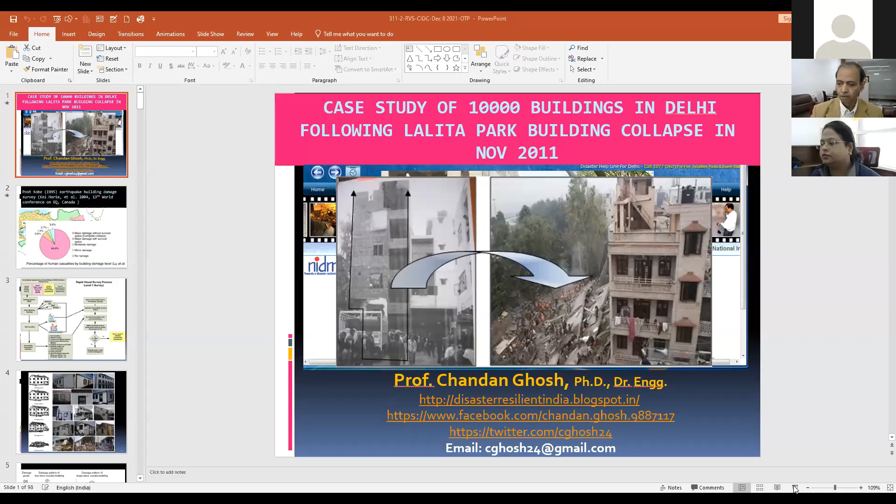So let me share my things. Okay, yes. Okay. Is it visible? Yes, sir. Okay. So this is something that I'm going to show about the case study of

10,000 buildings in Delhi, which was taken up after the Lalita Park building collapse. The study was taken up in November 2010, when the building collapse happened, and then we took it up in 2011 and submitted our report in November 2011, this survey report.

And the report was submitted online, because the format that we are going to discuss quickly today, even after that in the last session of today's session, is about the kind of software that was developed at that time in PHP programming at NIDM.

These are some of the photographs taken where the building, which you can see, collapsed all of a sudden. At that time it was raining heavily, and 2010 was the year Delhi organized the Commonwealth Games. There was heavy rainfall in Delhi, a record rainfall, which inundated many areas in the east part of Delhi.

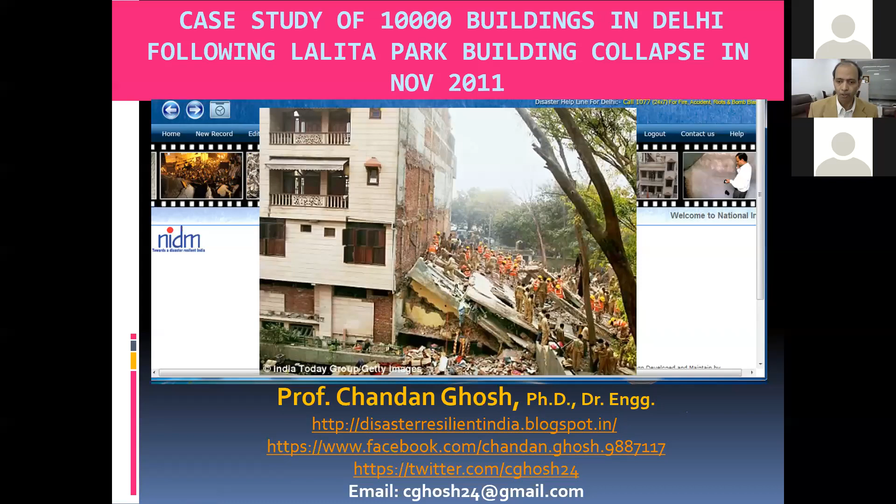This was the building photo that we could collect from some sources during the investigation, showing the building before the collapse. This we could collect at that time from some sources. And after the collapse, this is the condition, the other side, as you can see.

Now let us see that we have been doing some kind of exercise, but very few such studies have been done meticulously in our context here. That is why, in order to take inspiration from some well-known case studies...

...like the Kobe earthquake, post-Kobe earthquake building damage data in this city, which is presented in a paper by K. Horie et al. The survey was done following the earthquake, and it is published in the 13th World Conference on Earthquake Engineering, Canada. The paper is available online. You can see what kind of meticulous survey was done, and what measured damage ratios were found. In 1996 itself, this survey was done following the earthquake in 1995.

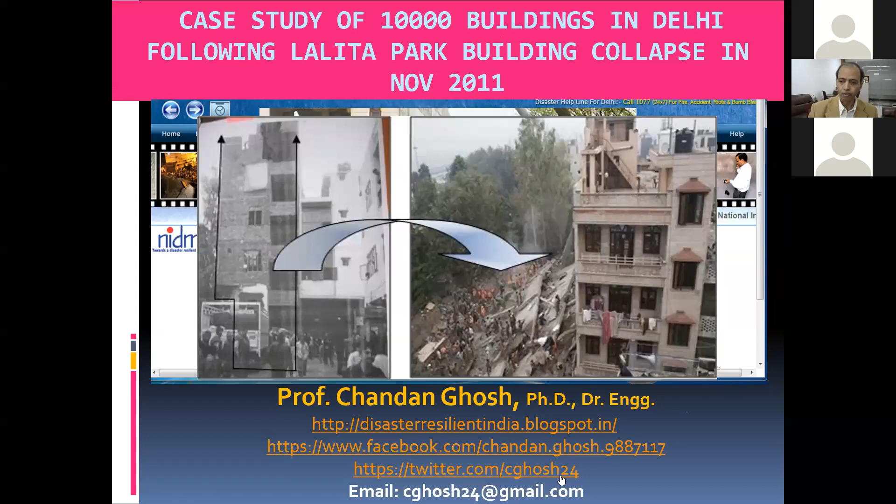Now there are many steps, taken from examples elsewhere about India. These include various steps like rapid visual screening survey, detailed vulnerability and case-specific vulnerability assessment, which we have discussed. Then types of buildings: masonry, RCC, steel, wooden, mixed, and industry, and many such types.

So think about how, when we are making the software, it will need provision for classifying the building type that comes in. And then what are the vulnerability factors for building typology?

Its location, whether hill area, slope area, soil conditions, seismic zoning, local and collateral hazards, and then construction material used, and the age. Then building features and profile, whether it has a cantilever, soft story, steel, mixed construction, or whether retrofitting has been done before or not.

So you can see, what we did in 2011 had more than 325 aspects, which I'll show.

But if we go into finer details, there may be more than 2,000 parameters which we have to identify while going for step 1, level 1, level 2, level 3. So in that case, the server or the software will have the space for keeping all this data.

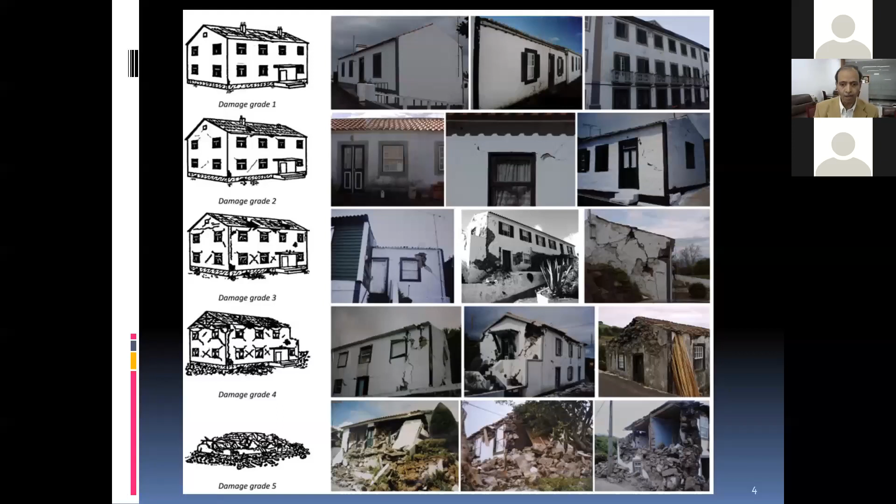So our aim is to get all of you familiar with seeing the idealistic sketches of damage pictured here and getting familiarity with matching that in the field. So you can think of how much - not knowledge, I would say, but understanding the motive behind going for such kind of damage classification.

In Japan itself, in the same paper, they have got damage grades D0, 1, 2, 3, 4, 5, 6 - similar kind of classification. Here there is a damage pattern for a 2-story wooden building, which they took as an example. So we have taken inspiration from such discretization of building damage categories done by various agencies across the world and in the country.

So these are the guidelines, the building damage pattern chart for wooden buildings only. If it is RCC building, steel building, or prefabricated building, mud type of building - day before yesterday I mentioned in one of the projects taken up by NDMA more than a decade back, about 33 types of buildings have been identified in India. So you can say Assam type house, Dhajji Diwari house - that is also one of the types.

So we say the mud house. There are mixed construction, there are prefabricated construction. So all these things have been categorized there.

So while going for this survey, we have to put those typologies, already defined and available, into our server, so that wherever the survey will be done, irrespective of the places or geology, the building types are predefined in the software so that you can match and select the type of building you are surveying, so that we get authenticated information from the field.

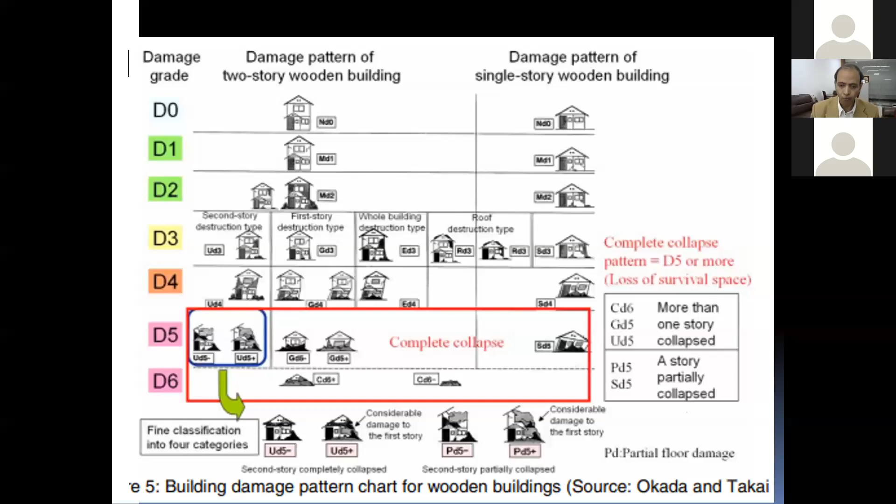Not only damage - that is one domain - but also building type, which is undamaged or currently existing. So when we are mapping their current situation, there are some other criteria which are to be populated into the software.

So according to grade 1, grade 2, grade 3, and then RCC building, then masonry building - like in our survey we have identified 20 types of buildings. For each of them, such kind of category will come.

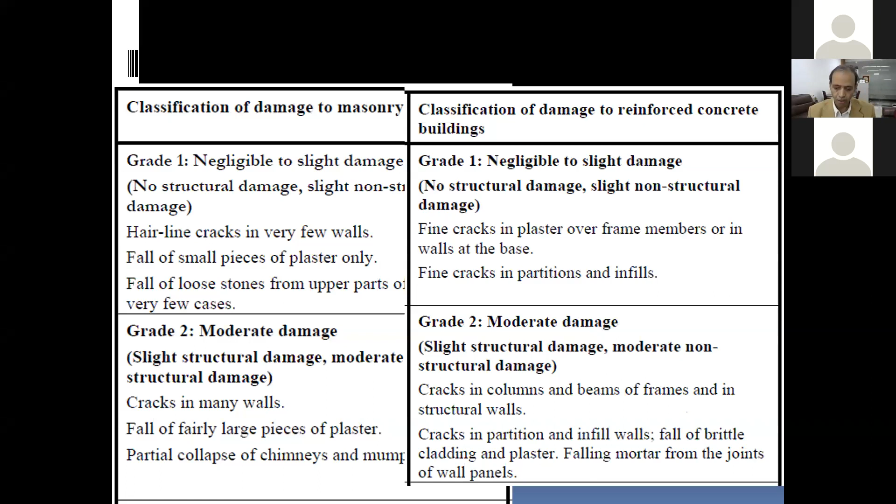So you can think of the amount of database we have to handle, and they are to be related and characterized - category of the building and vulnerability based on factors like hazard, whether it is earthquake, earthquake and landslide, or earthquake and flood. So those categories will come when we are able to match and relate them based on the type of building and type of hazards, whether single, double, or mixed - everything.

So it is a huge exercise to be made, and I would say it is much more complex than what we have been thinking of so far.

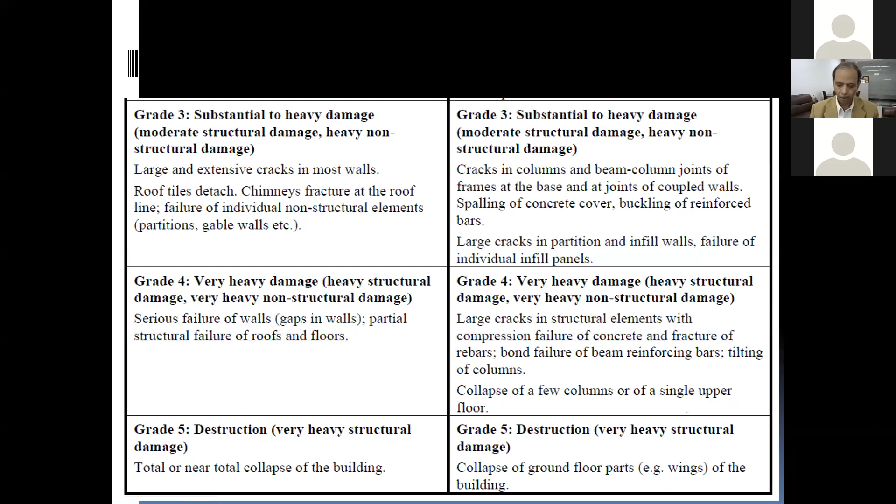There are 5 types of destruction, from very heavy structural damage to lesser grades, given pictorially and also shown. There are certain ways to score them, because when we make building damage a category, grades 1, 2, 3 don't make sense by themselves, except that by seeing the images we can make sense of it, but that needs experience. What we have to do is convert them into numbers or scores or some kind of standard for comparison and probability.

So a lot of approaches have been made. I will not go into those details, but basic structural hazard scores, score modifiers, and final scores are all measures of seismic damage potential of the building under evaluation. It is minus log 10 of the probability of collapse given the maximum considered earthquake. These are some of the basics involved, which we have to incorporate before making the software for survey available to trained engineers or even students next year.

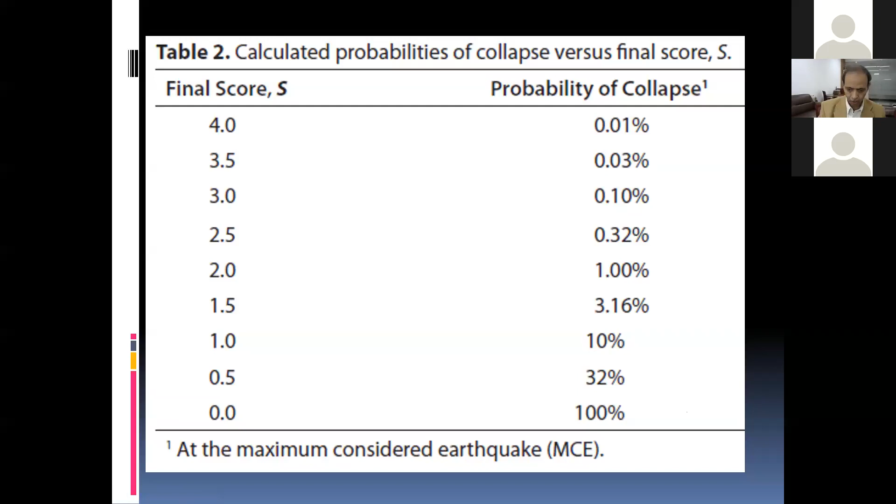These are some of the things that will be taken up which are not available or not under the scope of IS 1893. Based on that basic score, soil class will also be taken up.

Soil class, according to NEHRP USA International Building Code, defines hard rock, very dense soil, stiff soil profile, soft soil profile, and something even weaker which is not engineering soil. Depending on the type of soil, if an earthquake occurs in hard rock, the response will be different than if the same earthquake affects the subsoil on which the building is considered. These things will come up in the FEMA methodology, which has also been revised recently, around 2013-14, based on these considerations, which is a different area.

Then, for the type of building, you see what they have done and what we have done as well. They have made about 15 types of buildings. Concrete types are C1, C2, C3, then tilt-up buildings, and we also have PC1, PC2 precast buildings, then light wood frame residential buildings. These are all classifications defined in the FEMA code, which initially came up in 1988 and was revised, then further revised again. It is available online, you can see these details.

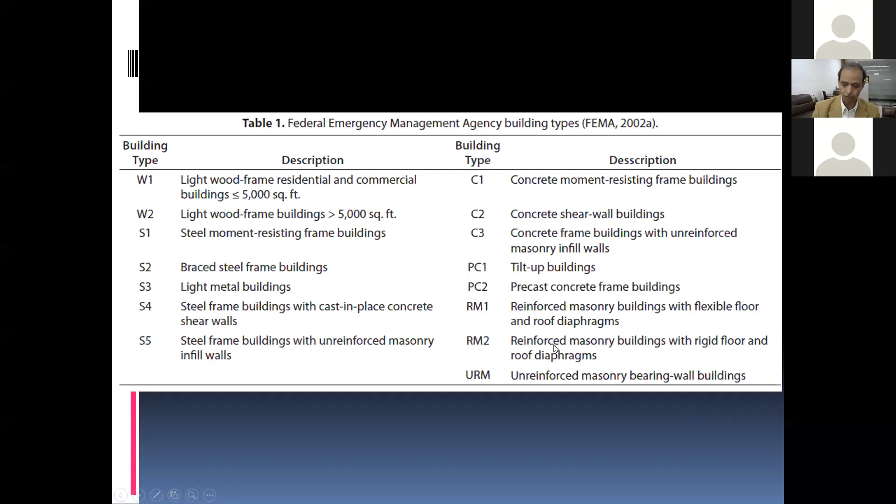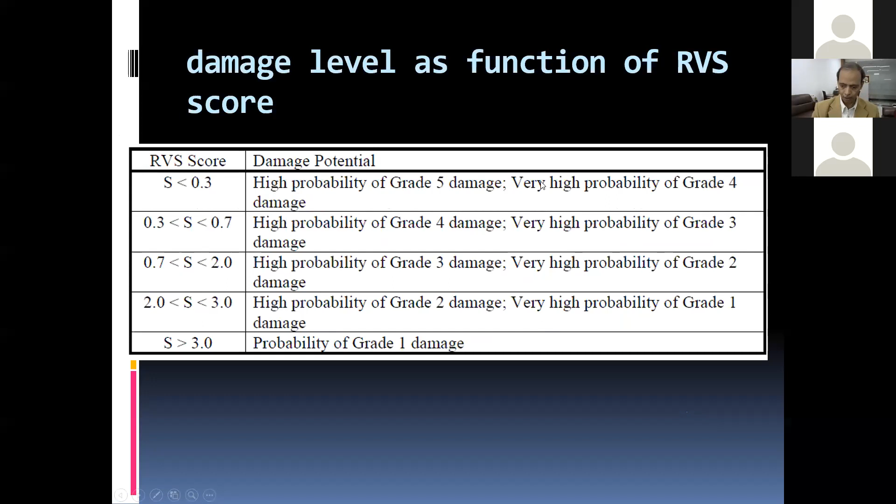So finally we come to the RVS score, the rapid visual screening score according to FEMA. Let us go into this, this is for seismic zone 4-5, which has been adapted in our code from FEMA 154. This was adapted into our code way back in 1993, and some of these rapid visual screening formats are available in the code, which gives us a way to make a score based on the defined procedure.

So while going for the real building check, which we are aiming at, this was done way back. Now, along with software on mobile, laptop or desktop, we would see this while checking buildings, as it is being done physically here. When this scoring as per this definition is done after visiting the site, we put the information in this manner, and we get certain valuable information which we want to make available on the website, and also for the decision maker, whether in the line ministries or departments in the country, for taking necessary steps based on this classification. All those classifications are mentioned here.

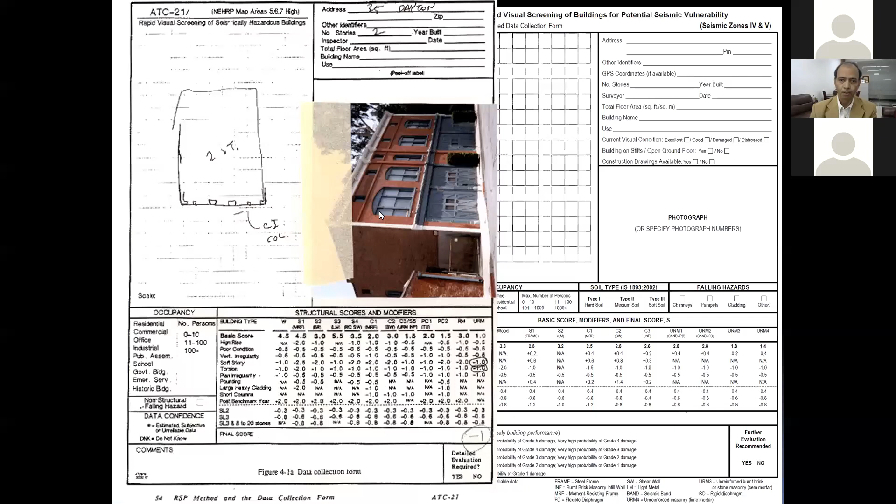Anyway, there are many other things. Let me go directly to the point quickly because of time. Okay, 2 minutes I can take. I was speaking to Nitin sir, if he could wait 5-10 minutes, then you can complete your presentation. He has joined, it seems his name is appearing. Okay, because this will take some time, I'll take it up later.

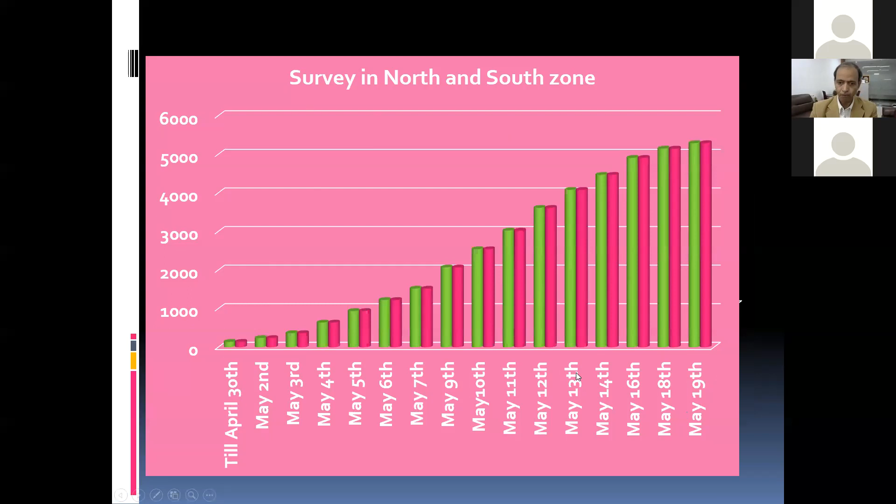Okay, my topic was how we did the survey. How many buildings have we done, and on which dates. These are from 30th April to 19th May 2011, covering almost all 64 wards in East Delhi. More than several MCD engineers were involved. Finally we got this data, mostly 79% residential, commercial, mixed use, storage, shopping mall.

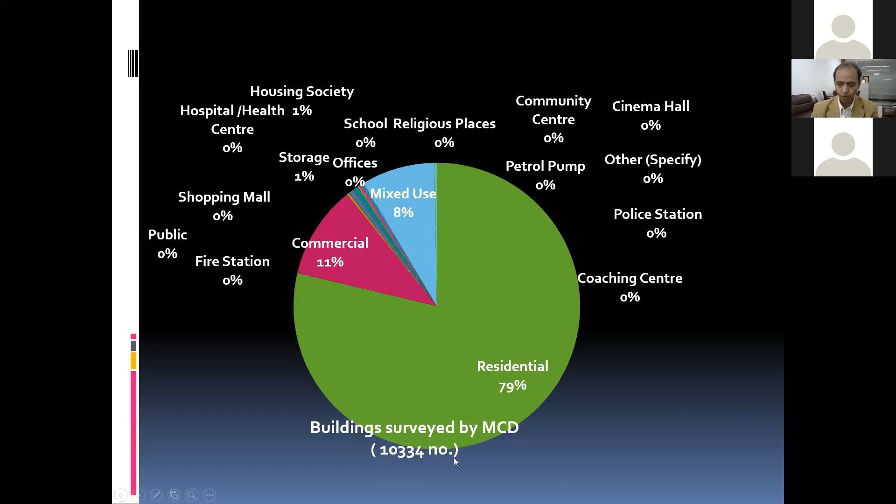There are about 20 types, even police station, though we didn't go to petrol pumps, but we kept this classification including schools and religious places. Buildings surveyed by MCD numbered 10,334, and we have shown that we also did a special survey where we gave a lot of time, more than 300 buildings.

Authentically residential, because here mostly we did residential buildings, but when we took a smaller sample, we went into all building types: educational, fire station, hospital, petrol pump, religious building 2% out of 300. So all these things including under construction buildings, water tanks, and schools 4%, like that, we did at that time.

So these are the spots, this is East Delhi. These are the spots where 300 buildings have been surveyed, shown over here from the Google Earth available at that time in 2011. We concentrated most of our buildings here, but we took samples from all these spots shown in green to represent all types of things.

In fact, in the Google Earth itself, at that time satellite data were not available. This is the ITO, and this is Lakshmi Nagar here, where a building collapse occurred. We have done maximum surveys here at this place.

And all of this was done without any expenditure, by some students that we hired. More than 30 students were hired for about 6 months on a daily basis, and they went to all these places.

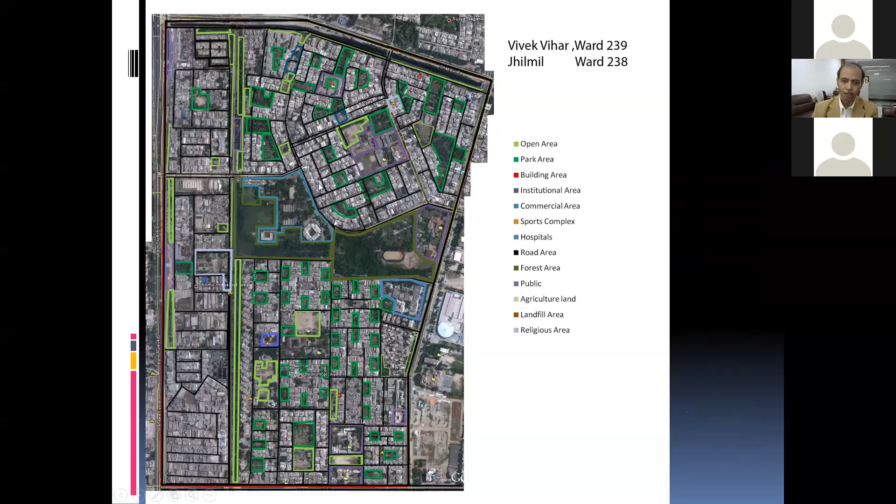So while showing the building area in East Delhi, how much is the building area? Here we said what is the building area, shown in red color, and the rest is other area. So we checked the building area in meter square, and also showed the road area, how much is the road area. So all these things we tried to discretize.

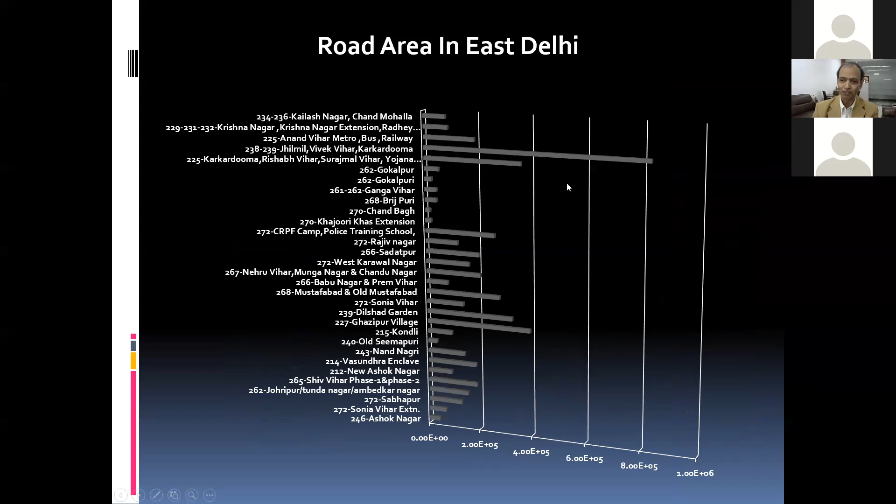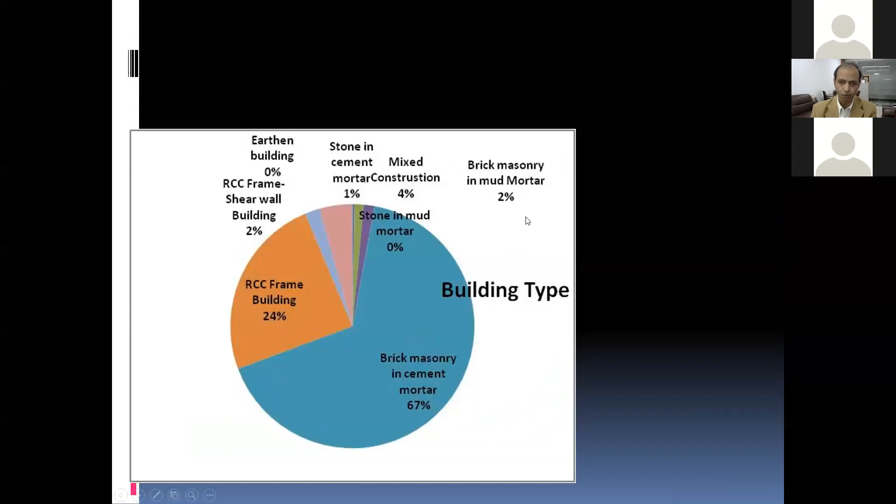Land uses in East Delhi were also plotted, and in one ward area, how much is the building area, and what are the other areas in Ashok Nagar itself, building type, brick, masonry, cement, all these 20 types, though here only a few types we have done. Building area wise also: authorized, regularized, unauthorized, resettlement colony based on MCD categorization, and age of construction was also categorized.

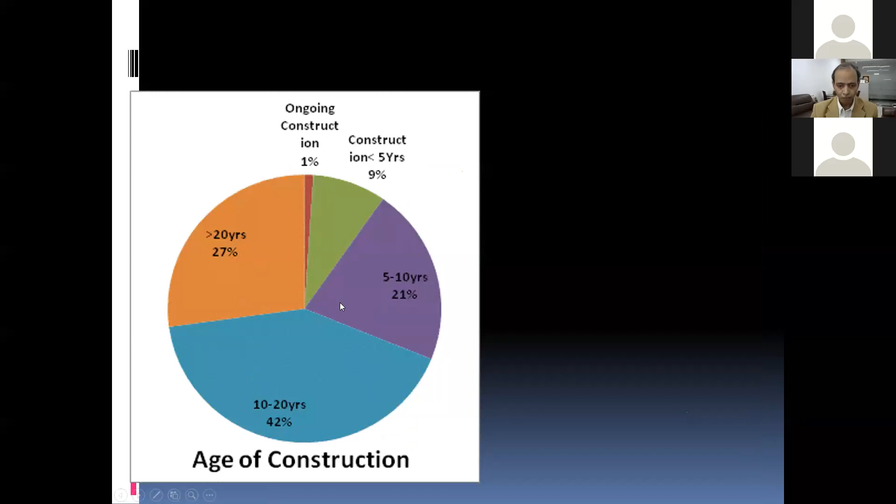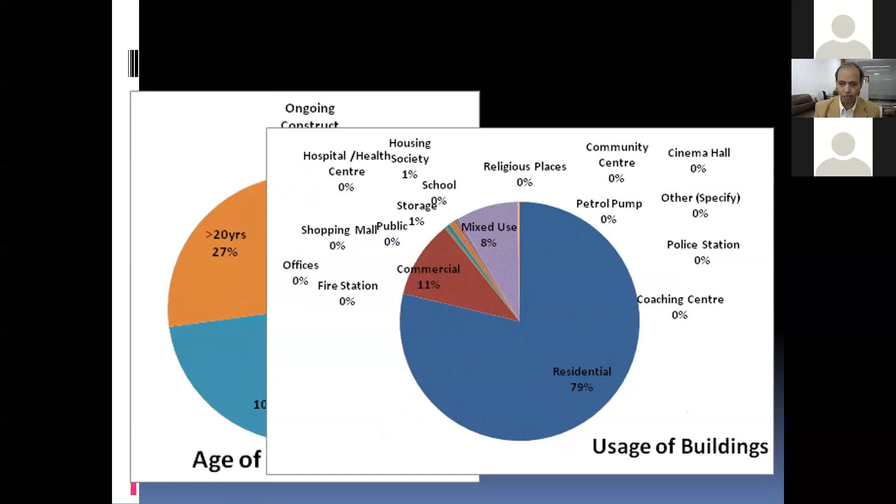This was possible because we made the software, and we could search through that software, which I showed in the first page of this presentation. So we could find out through query searching, and use all this categorization and plotting. All this is available even now in a spreadsheet that we can put into whatever format we want.

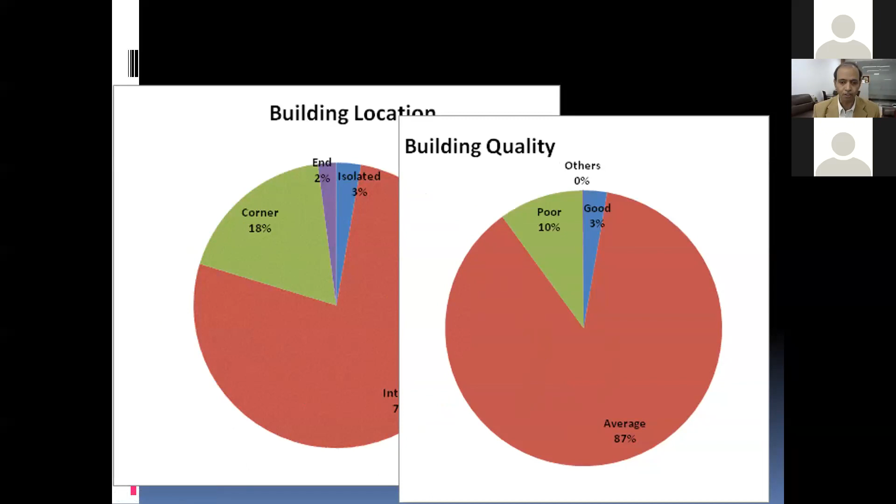Most of the buildings are internal, with other building properties on both sides, corner areas and other things. Whatever keyword, as I said, 325 cells were made, so 325 into 10,334 cells of information are there. So a query search can be made with any 1, 2, or combination, which gives us this kind of data.

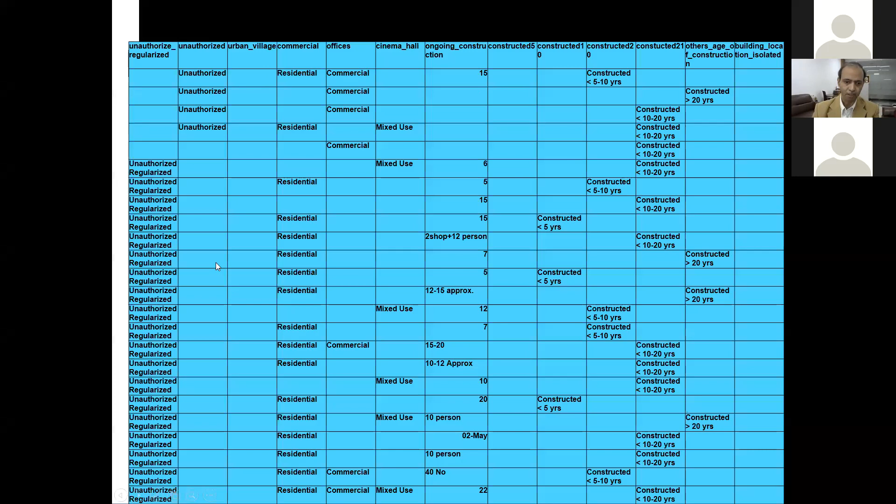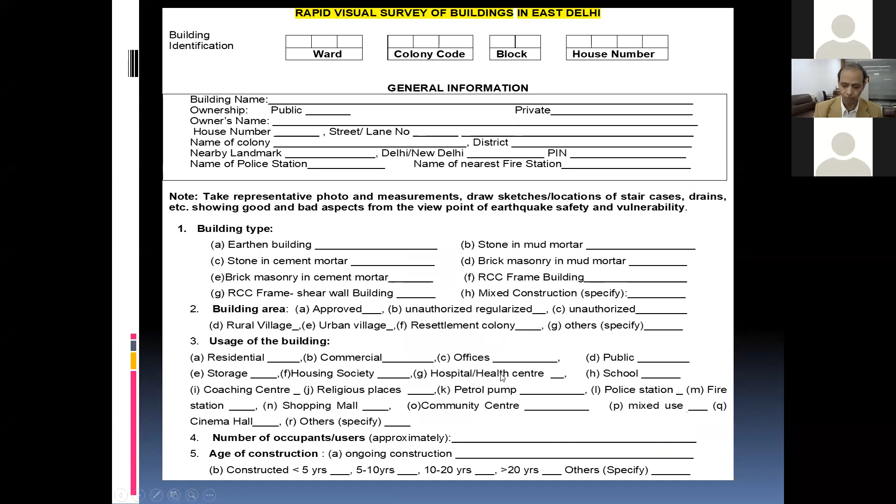And then these are the records, 10,448 records, showing that ward area, and these are the buildings. Along with that, 6 pages of the format are also made available here. In fact, we have submitted the entire thing, 60,000 pages of information, in software form and also in printed form, with more than one mirror of printed things, because court wants everything in print. So that way we could submit everything in November 2011. So all the search and queries, everything is there.

South zone of Shahdara, north zone of Shahdara. This you can locate. I'm taking cognizance of all this, and we have visited, and several engineers cooperated, and then 30 plus students that we have involved in our work, including graduate students also.

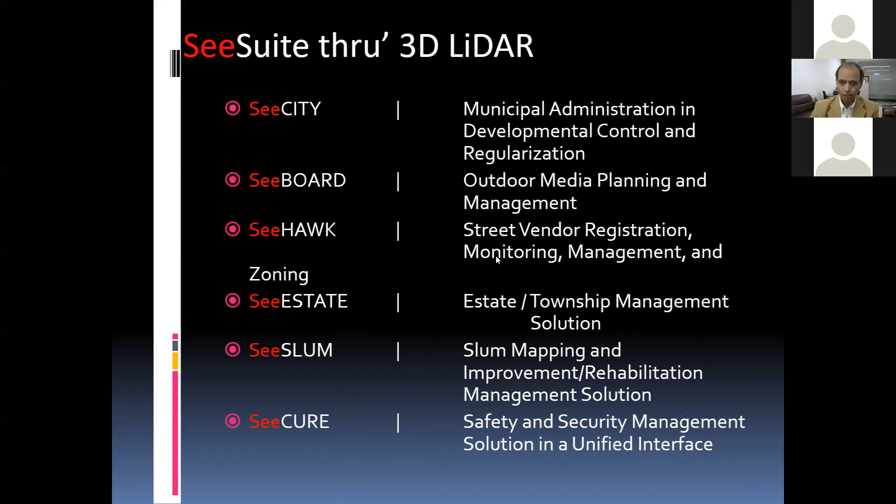Okay, let me end over here. There are many other things that we have to do, as I have mentioned, LiDAR and walkthrough survey. Through that only we can make things more easier and smarter, and lots of information that we can make available for the decision maker. Thank you.

We'll discuss maybe at the end. Yeah, yes, sir.

Okay, sorry Nitinji, I have taken your time. Thank you very much, sir, for a very informative presentation, also unique in nature. I think we need to take up such surveys and studies in different parts of Delhi as well as in other cities also. Since you have already said we will discuss this presentation after the other two presentations, we move straightforward to the next presentation by Mr. Nitin Verma, who is co-founder and managing director of ACNI, on retrofitting of buildings, the case studies.

Sir, Professor Ghosh, would you like to introduce him more? Yeah, he doesn't need any more introduction, because Nitinji is very practical as well as pragmatic, a practical architect cum engineer. He knows more engineering, site engineering, than...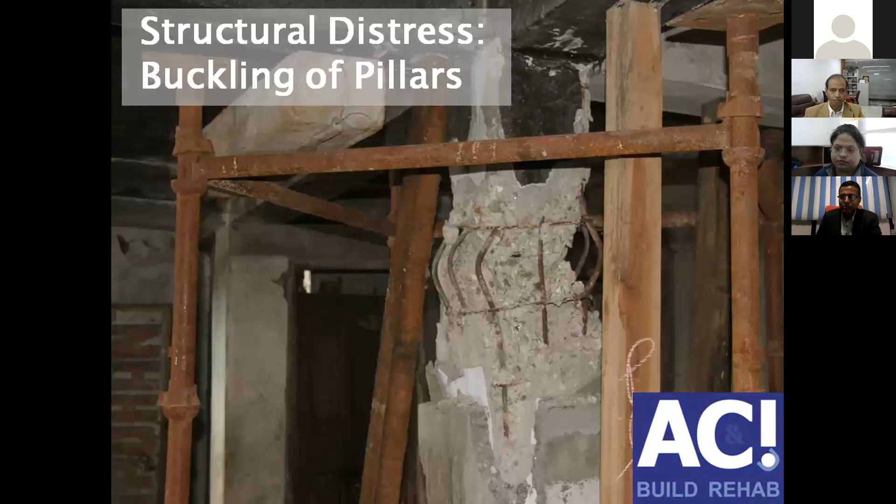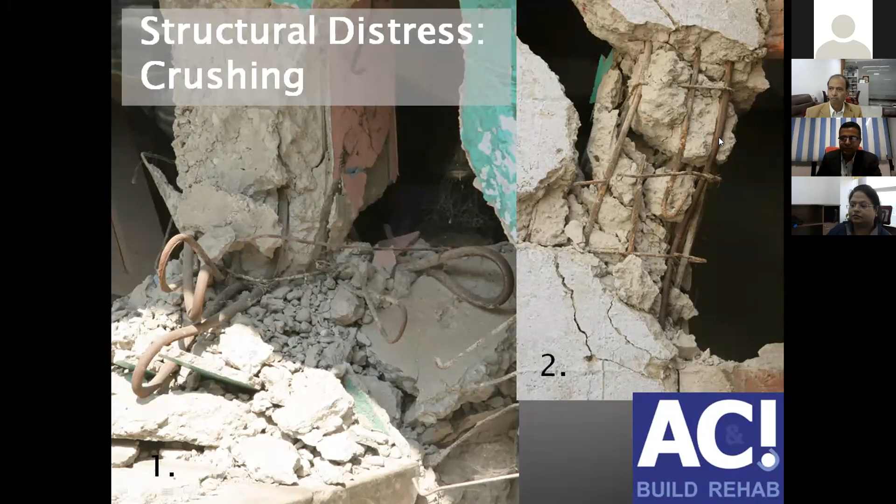I'll just quickly run through these images, though Dr. Ghosh has a better pool of these images than me. This is structural damage: buckling of a concrete column, failure of a concrete column. Another failure - look at the reinforcement on the left-hand side, the folded reinforcement, absolutely nothing in the stirrups at all. That is from Gujarat, the famous picture of story collapse. This again is from Sikkim, non-structural damage, but to an extent that the plaster is as heavy as the concrete itself. Back to Nepal, shearing off of the beams - you can see shearing of the beams here, and damage into the non-structural parts as well.

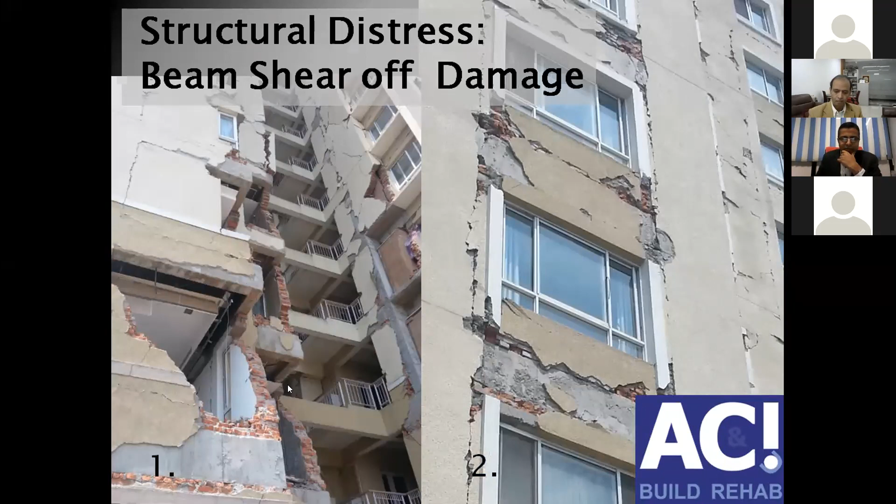Being based in Delhi, the majority of our work happens in or around Delhi, the NCR region. Though we have worked up till Bihar, we have worked in the hills, we have worked in the western part of India, but the majority of the work is still in Delhi NCR.

Obviously, the reasons for poor performance of RC frame buildings - and Mr. Amandeep must have taught you this - are inadequate design, substandard quality, long period effect of the concrete, soft story damage, and local soil conditions. I will not go into the theory; I'll rather take you to some interesting images.

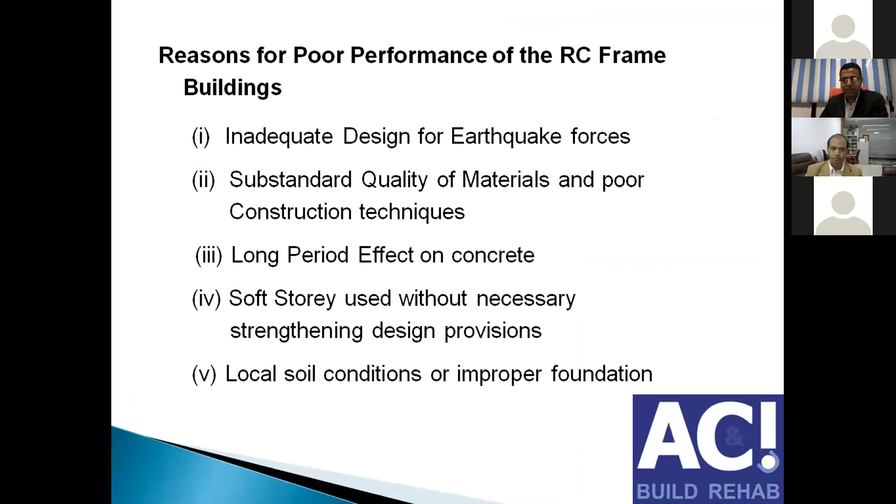But before going into the experiences, let me show you how we also work.

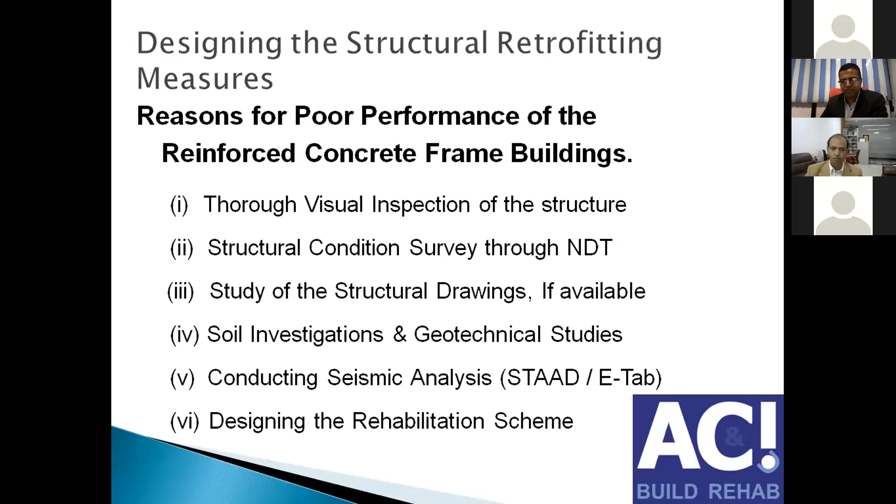The reinforced concrete frame buildings need a thorough visual inspection first: structural condition survey through NDT, study of the structural drawings, soil investigations, geotechnical studies, seismic analysis, and finally the designing of the rehabilitation scheme, which addresses the deficiencies.

Now, what are the deficiencies generally in a constructed building? Deficiencies of a building structure probably can't be seen with the naked eye - you need scientific tools for that, which goes beyond the scope of this training session, since here we are more focused on visual analysis. So what is the deficiency? Let's leave that question for the moment, but the deficiency of a structure manifests itself as distress on the surface of the building. So any crack that appears on a building part - whether on a surface, column, beam, or wall - it has a story to tell.

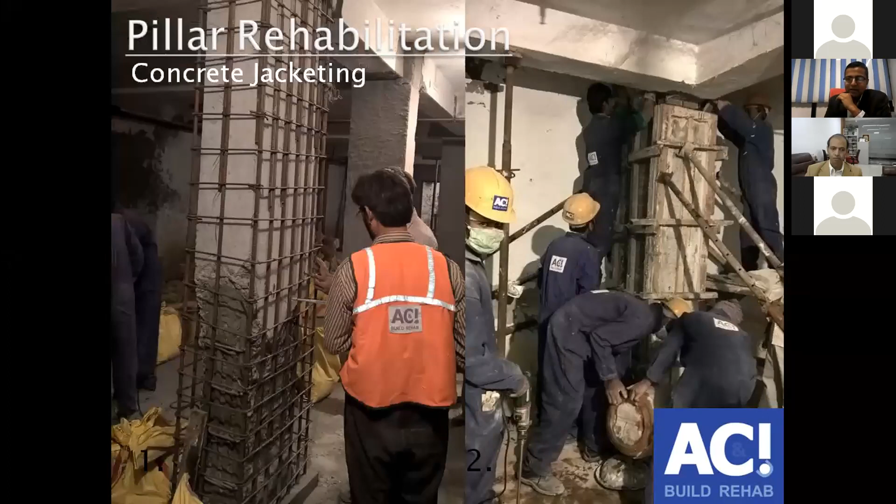Any distress to the reinforcement makes the structure unsafe. What do you do? You immediately tie it up with additional reinforcement, find out the deficiencies, design the reinforcement required, and repack and recast it all together, which is effectively called strengthening by means of column jacketing.

The column is jacketed with a new surface all around it.

If I can say this, in a human being a bone cracks, so you go down to a doctor. What does a doctor do? The doctor says I'll have to plaster it up, you can't move it, it will heal on its own. The calciums and other minerals within your body will heal that bone crack and you should be fine.

In case of concrete, there is no natural process. So a plaster or a covering or a jacket needs to be applied onto the column on a permanent basis, and that is what a retrofitting design needs to work out.

So if that is a jacket, additional steel has been added onto the column. Steel can be added to any building or construction in concrete to make it more robust, more strengthened, more seismicity proof, or more susceptible to reducing damage that would be caused to the building during an earthquake. So any structure can be strengthened to any scale by means of jacketing.

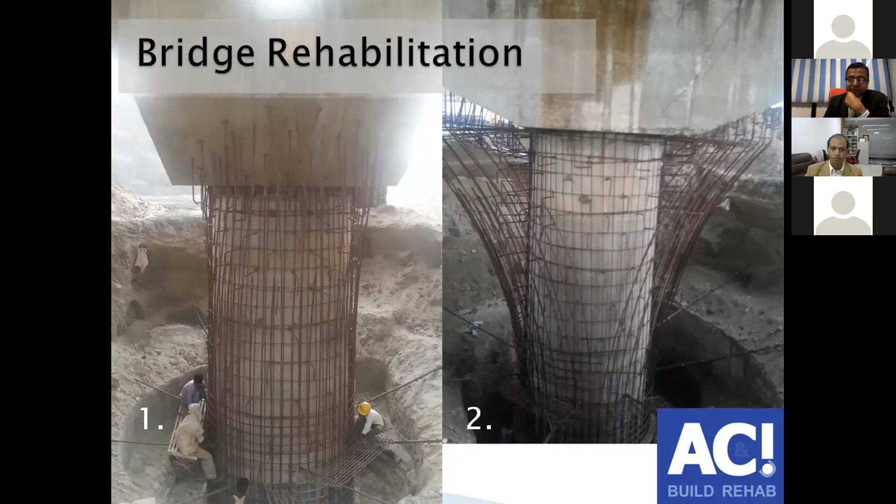This is a finished product. So here you have a project, here you have a pillar. You can see the diameter of the column over here, and this is what it comes out like after it is finished.

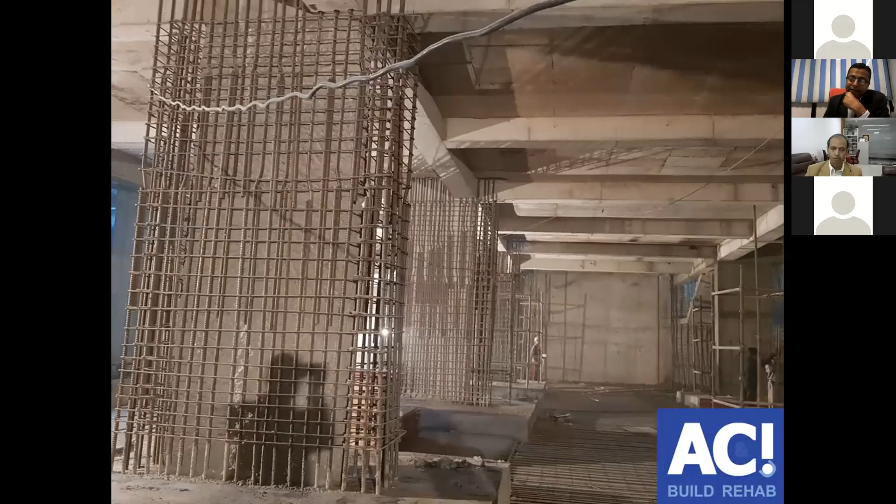Now this strategy of jacketing can be applied anywhere and everywhere to strengthen your buildings for seismic load. Most of the old buildings were designed with the old parameters, the national building codes prevalent only at that time, and now the codes were massively upgraded after the Gujarat earthquake.

That doesn't mean the existing buildings, which were safe at that time for those particular codes, are now safe. The code is a guideline, and if the guideline has been upped, then the structure needs to be strengthened accordingly. So jacketing of any member, whether it's a column, a beam, or even a slab, can be undertaken to strengthen it and reduce the seismic risk.

Just as the column has been strengthened with additional steel and then jacketed with concrete, the same measures can be undertaken on a beam. You can enhance the size of a beam as well. So if a beam is under-designed, or found to be under-designed, the section can be enhanced by means of concrete jacketing. All you need to do is add the appropriate reinforcement and box it up.

That can be done to the whole of the grid together. The other way to do it is, if you don't want to do concrete jacketing, if you feel it's slightly messy in that particular location, then the way it can be done is to reduce load.

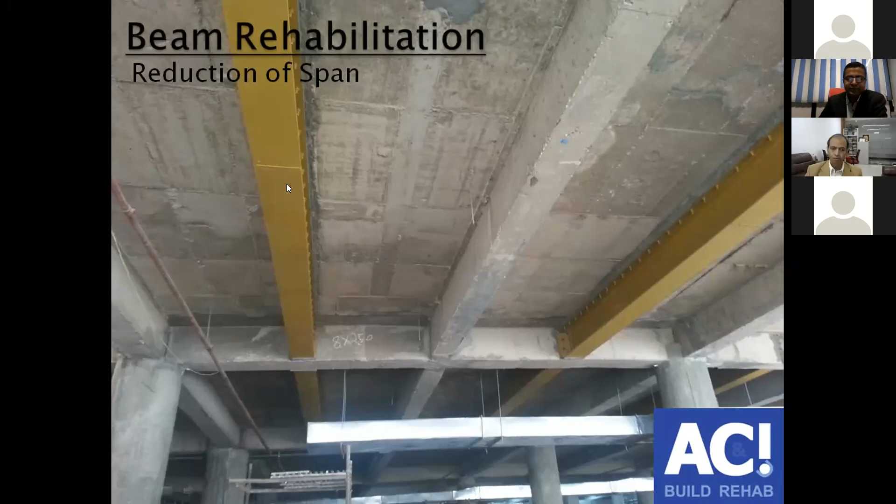At the same time, existing beams can be repacked from every side and the size is improved. Or these can be jacketed by means of a steel plate. The advantage with steel plating work is you can limit it to whatever zone you need. If the jacket needs to be done only to the shear zone, then a steel plate is a very effective means and mechanism to do that.

Same as with the slabs, collapsing slabs. The soffit of the slab has collapsed because the reinforcement under it has corroded. And this corrosion obviously leads to distress in the structure.

At the same time, you have got a condition of a slab which has no concrete cover beneath it. So what happens? The effective section area of the slab reduces drastically. That means if the effective section area reduces, the load carrying capacity and the forces that the members need to take care of also reduces.

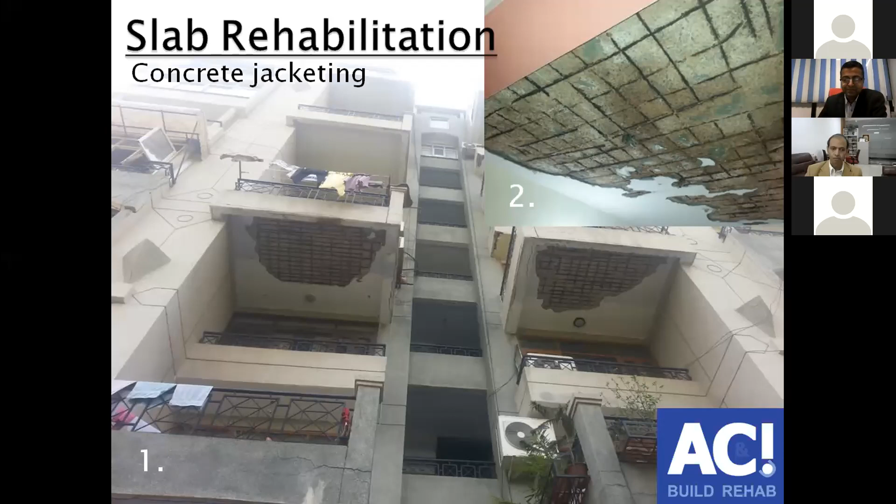Solution: add another row of reinforcement beneath it and pack it up, or steel plate it entirely. The section size improves. So you've seen a white beam, the size of the white beam which is the existing one, and then you see the jacketed size of the beam.

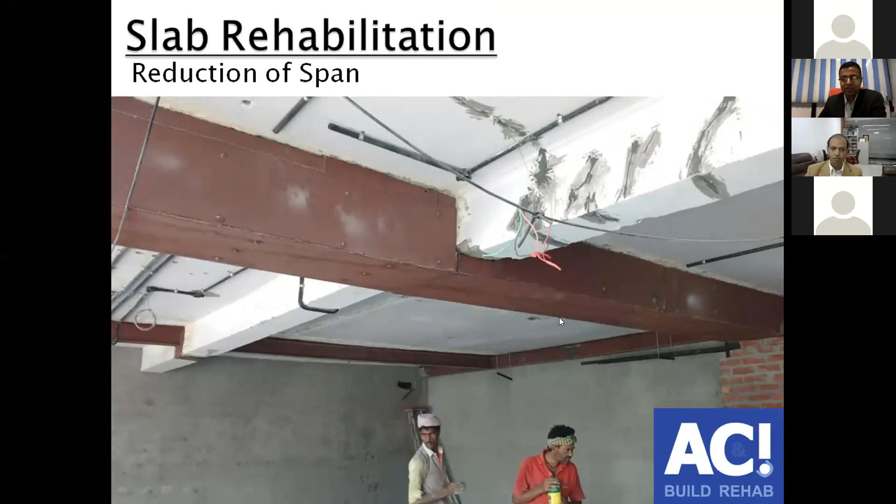The size increases. Now, there's another new material available, called carbon fiber. Carbon fiber is a cloth which is as good as a steel plate. It's more ductile, easier to handle, and it's some sort of cloth which can be wrapped around the beams to be covered, closed, and finished.

The same means of external reinforcement. These are the mechanisms where you can work upon your quality. In case your steel is found to be insufficient, you can't add to the existing steel, you can't break this up. So you have to add external steel.

External steel nowadays is available in the form of carbon laminates. Carbon, as you understand, is the hardest material currently. A lot of carbon fibers are now being used even in the aircraft industry. Cars are being made out of this, simply because these are the hardest material and very light.

So these carbon strips are very useful. These carbon strips add to the ductility. They're used as external reinforcement, and any cracks, which you can see marked by these white lines all around, can be taken care of with the external pasting of this.

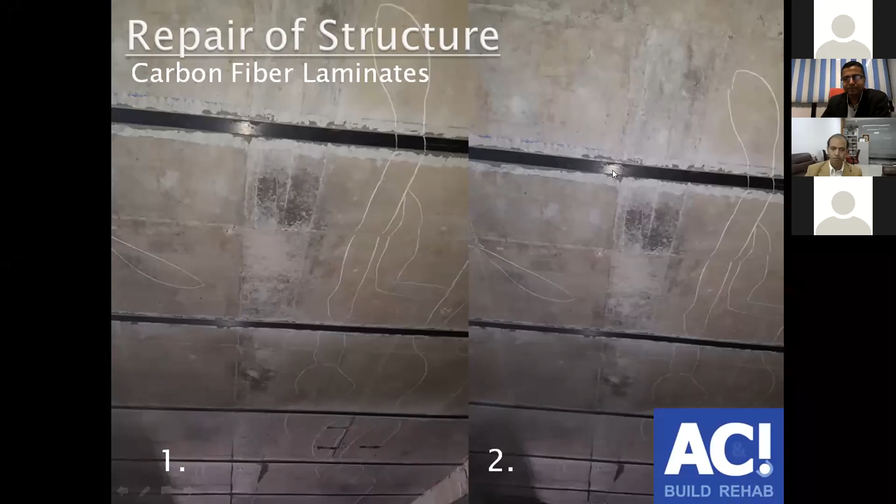Now, similarly here, this is Delhi Metro. If you see the black part of these, the black part is the carbon fiber wrap, again a cloth which has been pasted onto the metro lines as well. Incidentally, Aadhaar Consultancy and Infrastructure is the only agency registered with Delhi Metro for the retrofitting.

At the same time, the viaduct on top, the segment of the viaduct in this case, we have added additional reinforcement externally by means of these carbon fibers. All the outside black part which you can see from the concrete is very differentiable.

Coming back to the building inside, you see the capital in image number 1, the capital, and then the beam attached to it, the second part, the capital of the column and the beam attached. So all four beams, all the sides. So image number 1, column number 1, column number 2, column number 3, jacketed on top for ductility. This is seismic retrofitting because the code says that the joints have to be more ductile in order to take seismic loading.

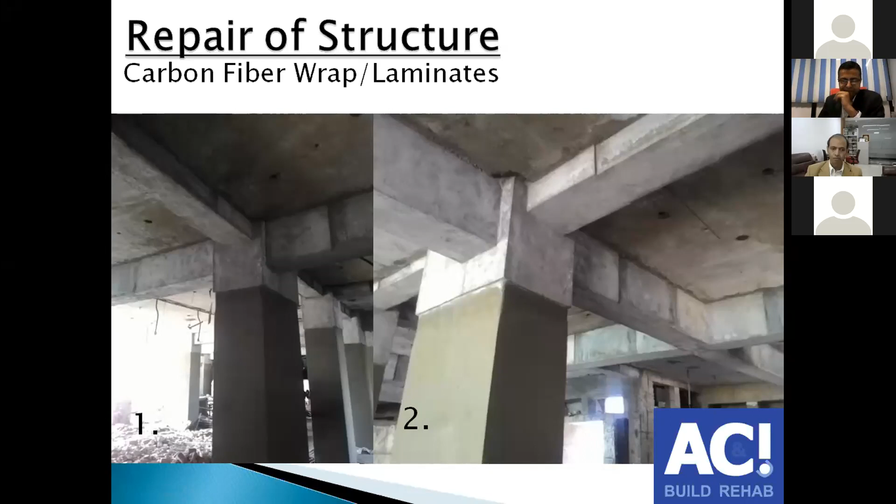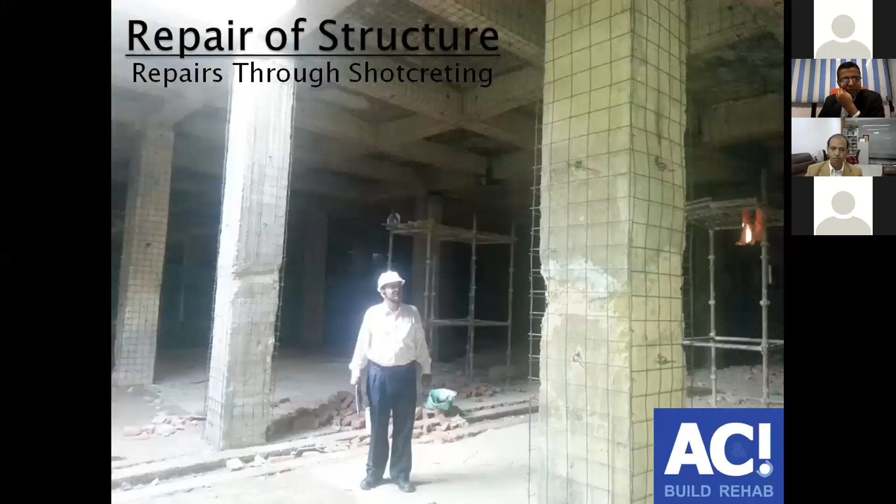The way to do it, you don't need to add strength, your structure stands as it is. So what you can effectively do is a weld mesh and do a guniting job over it. Guniting adds the concreting, adds a surface layer on top of it. But all it needs is reinforcement, which is very basic reinforcement that can be taken care of with the weld mesh over here.

These are the methods we have used in the past for the distress we've noted. Now I'll take you to another kind of experience. What if in a structure you find that it's not distress hurting you, but seismic safety is primarily required because the members themselves are underprovided? So you add the members.

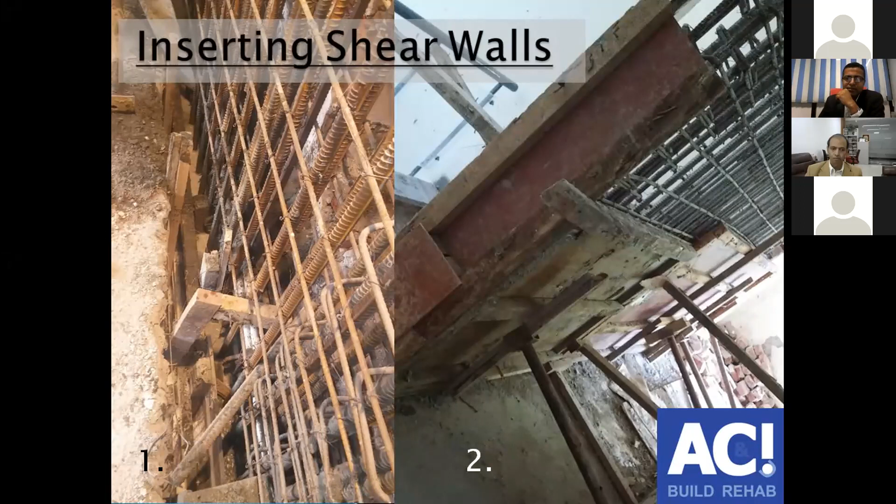This is one project where, in an existing building, shear walls were added. The shear walls need additional reinforcement and foundation strengthening. The foundation comes from the building with micropiles. You can see on the left hand side, micropiles dug inside a building, anchored to the bedrock beneath. Once the micropile comes up, these have been covered with heavy foundation caps from where the shear walls begin.

This is altogether a new prospect. Now we have started using not piles but micropiles or ground anchors as a method of retrofitting.

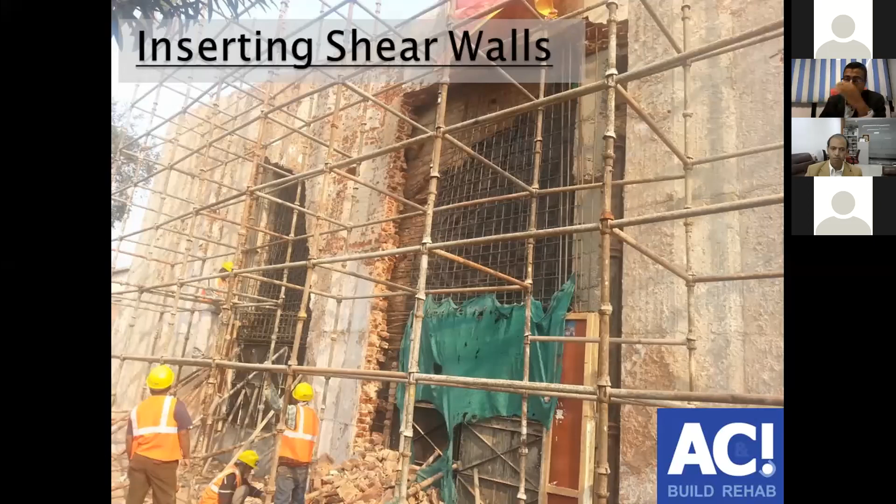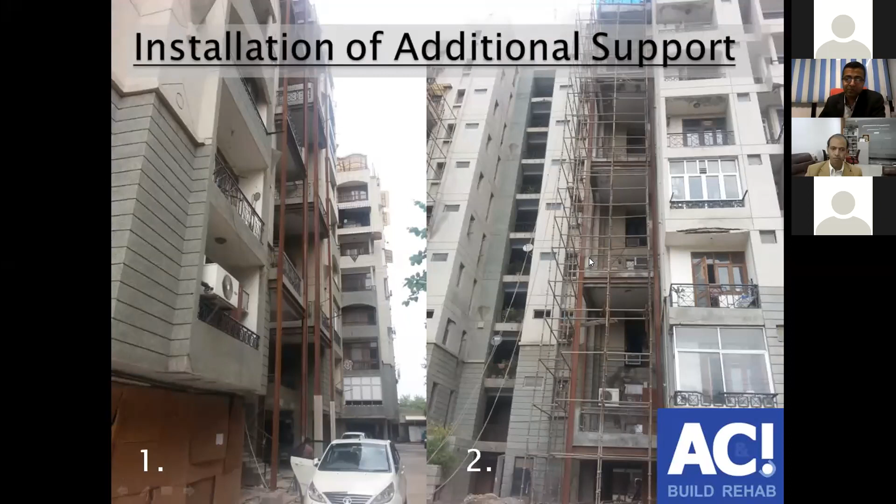So once you design your loading for the anchors, you can install these ground anchors simply by drilling behind the wall into the soil behind, anchoring it, inserting reinforcements into it, and grouting it together. It is a very useful technology in the hill area. Anything and everything can be saved with it.

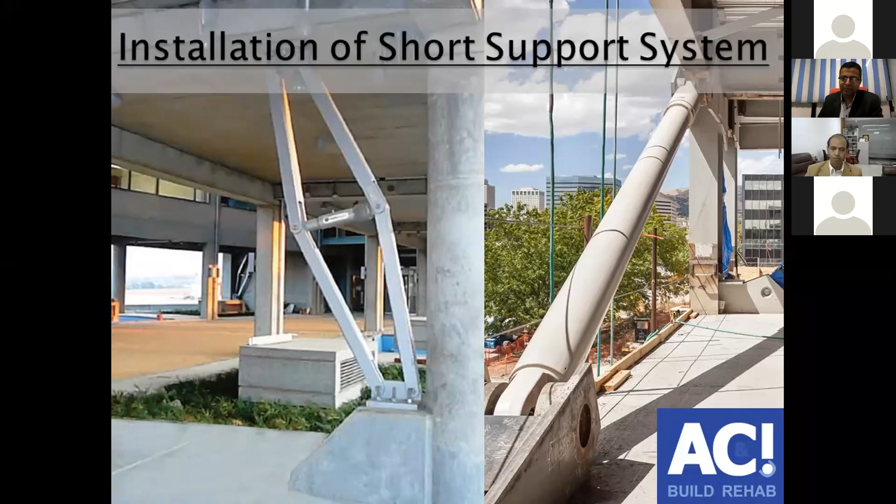But before all this, what Dr. Ghosh explained in his RVS is what you need to document: what are the damages, what are the distresses, how you document them. You have to differentiate whether the damage or distress shown in form of a crack or anything is structural or non-structural. If it is structural, it needs to be treated as I've shown in the earlier slides. But if it is non-structural, if very minor, there are means and mechanisms to treat them differently.

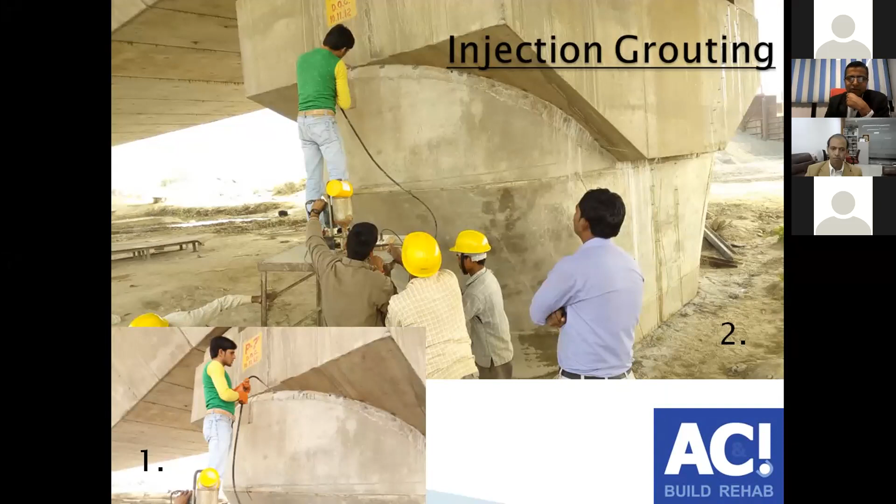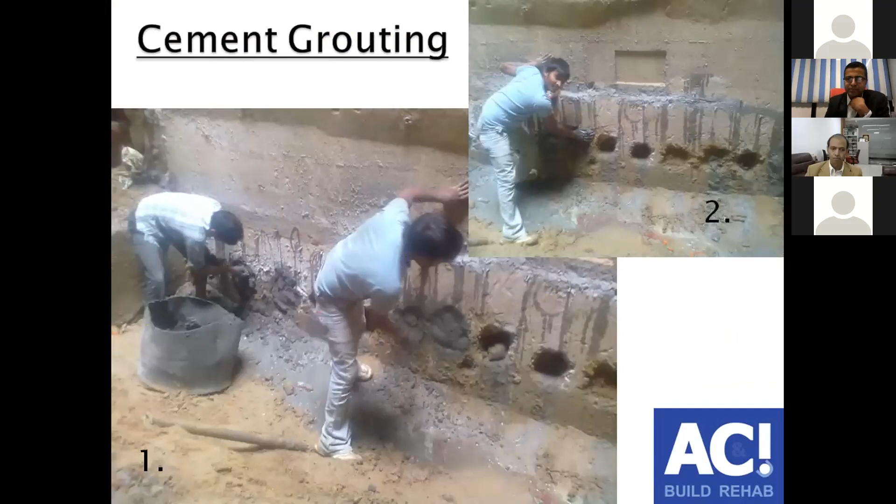Once you have jacketed, you have to fill up the gap between the existing and the new concrete. Fill up with epoxies, or if there is a cavity beneath, open up, make drill holes, and then pack it up with cement.

Remove the additional load, remove the structure, whatever is not required, or the damaged part, or the demolition, obviously going by the system the way it is.

Now this is seismic retrofitting of a non-engineered building, a completely different ballgame, where a non-engineered building is brickwork, where there are no columns and no beams. So even over here, the principle of retrofitting remains the same.

The principle remains that you probably will have to convert it into a box action. It needs to be tied together. A reinforcement, a column or a beam is not there, but a part of the brickwork itself can be converted into some sort of RBC, which is called reinforced brickwork.

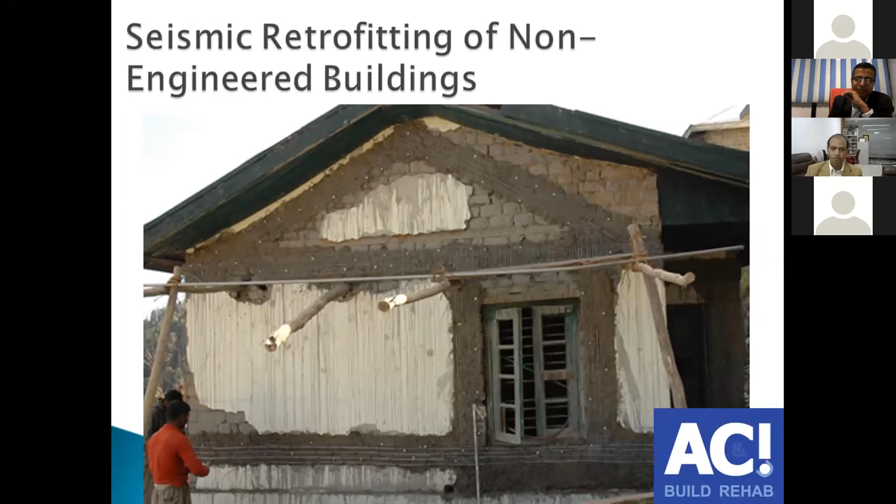So effectively, the idea is if you get your diagnosis of a building right by means of an RVS, and your RVS is done, then any and every building can be converted, can be retrofitted, and can be strengthened for seismic forces. And this is exactly what ACI does.

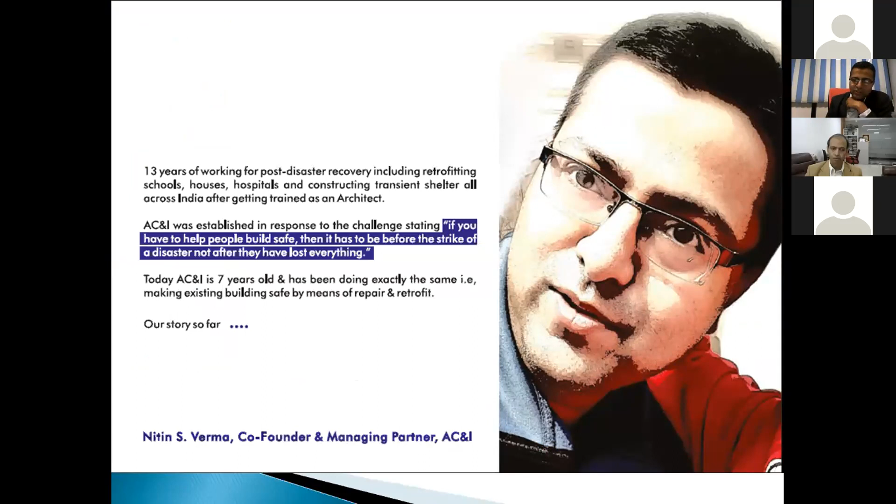A short description about us. I have been the founder of the company, and my experience has been in disaster management from the back. I've worked for 13 years, and now it's been 7 years that I've been running this company after that. We have done a lot of work, presentations, in this field. We have got a huge number of satisfied clients, including Government of India enterprises, multinational agencies, corporates, institutions, and real estate groups.

We have worked in Nepal, we have worked in Bihar, we have worked in UP, in Raibareily, Dehradun, Rohtak, Sonipat, you name it, and been there in northern India.

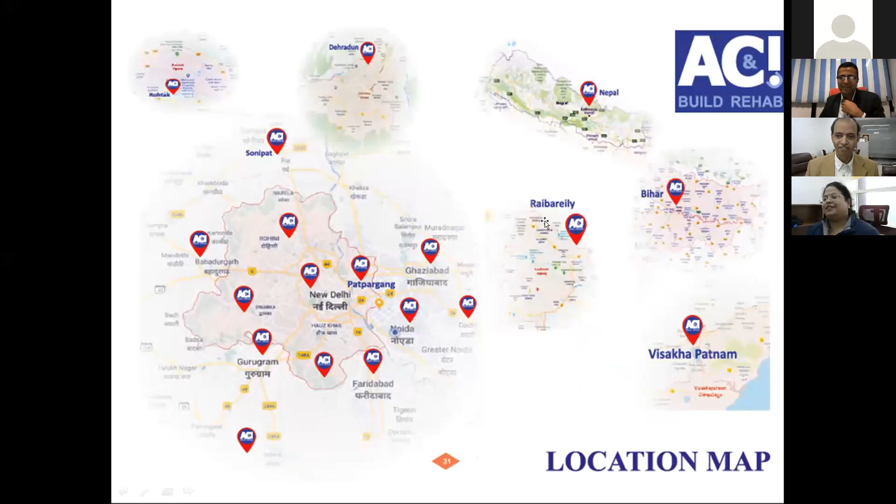I could understand all the different techniques you spoke about, the different sections of the building, how they can be retrofitted, what are the rehabilitation techniques, and different fibers, laminates, wraps you talk about, and how non-engineered buildings could also be retrofitted. So for me, it is a very educative presentation because I am a non-engineer person. So very nice. So I request Professor Ghosh to give his expert comments on this presentation and take up the question answers.

In fact, whatever is presented over here, there is no need of any expert comments on the expert's presentation, because he has presented in a very crisp manner, but very much the rudiments of taking care of the buildings that we think we take pride in - we design, we construct, we rehabilitate, we follow the code. But seeing the deteriorating conditions of the building, just like us as human beings, we take lots of pills and capsules as we cross certain barriers in life.

But at the same time, a building is also like a human body that we neglect most of the time. When it comes to so many cancerous items that are there, so many things that are there being reconditioned, and also checking whether they are all right or not, like a health checkup - even post-rehabilitation measures, which is of course their organization's responsibility, they check whatever repair has been done, before and after, whether it is going to respond to future effects or events in the long run, or whether there is a certain kind of warranty or guarantee, maybe 25 years, 30 years, on the building.

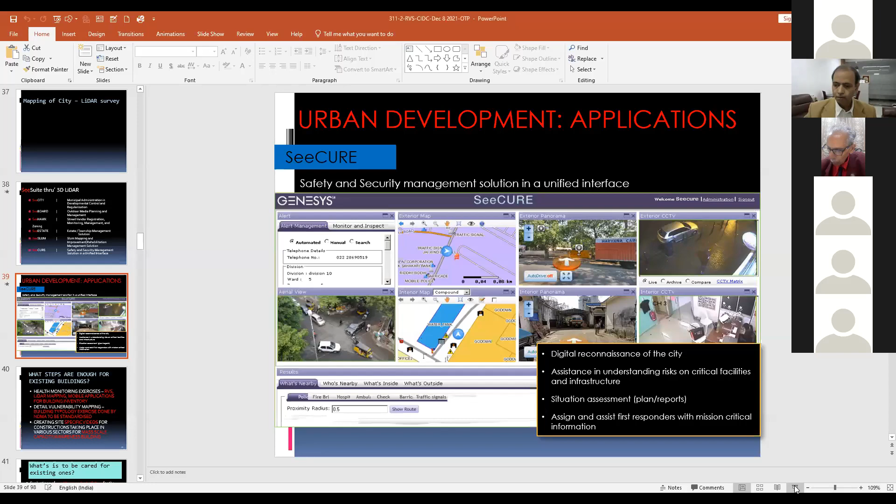There are many ways our city facilities, street map view, walkthrough are being done. 100+ cities have all the sites and everything surveyed. These photographs are done through LiDAR. You may have seen a YouTube video showing how a walkthrough is done with dimensions, using a handheld LiDAR camera, so you can virtually walk through and take a tour. Once this survey is done, it can be made available on our mobile, website, or web portal.

You can go through these and see this wall, that wall, along with the distance and measurements, which is vital, so you can check each and everything. Once a survey is done, it can be uploaded and made available as a walkthrough, which you are familiar with.

On the street, it can show directions and take measurements, identifying where there is a crack, even at millimeter or sub-millimeter level of dimension on the actual building or roads, or anything visible. Even from a kilometer away, it can make things visible along with the dimension.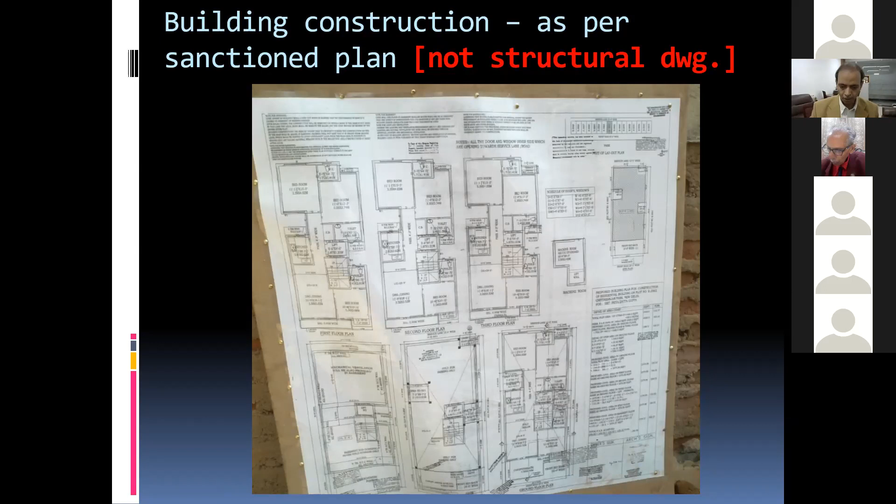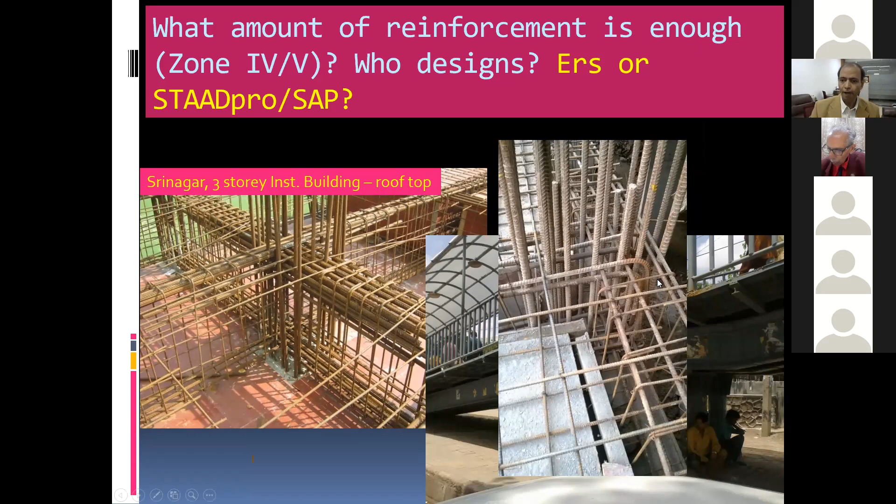I have taken photographs of one construction using my camera; there may be some objection, but this has to be displayed on the construction site as per municipality guidelines or building development rules. While such constructions are there, I often show how we are going to explain their performance, which I mentioned on the first day.

If a building has a column over here and here, I'm trying to look at an as-built drawing at the same construction site. You see whichever is being highlighted - because the structural drawing is not passed and nobody looks at it, everybody only looks at the plan, which is a sorry state of affairs in building construction. See the aspect ratio of this column.

It is 4 times the width, which is not permitted in case of earthquake resistant building construction, even though putting that 25mm rod reinforcement may satisfy our software, whatever the structural analysis or design, they may satisfy the design, but this will not satisfy the performance of the building in case of earthquake.

So for a 4-story building in seismic zone 4, since such kind of shape is being taken, software takes care of that. If the shape is not regular rectangular with aspect ratio less than 1.5, then you have to provide extra steel. So what the software does, in order to take care of such problems, is provide a steel requirement here that is extremely high.

On the other hand, when such things come from the basement and such a band is there, software doesn't take care of it, and it's not possible to account for their impact like this. So there are many defects you will see, and see the lapping that is being done, or the 90-degree bends and other things.

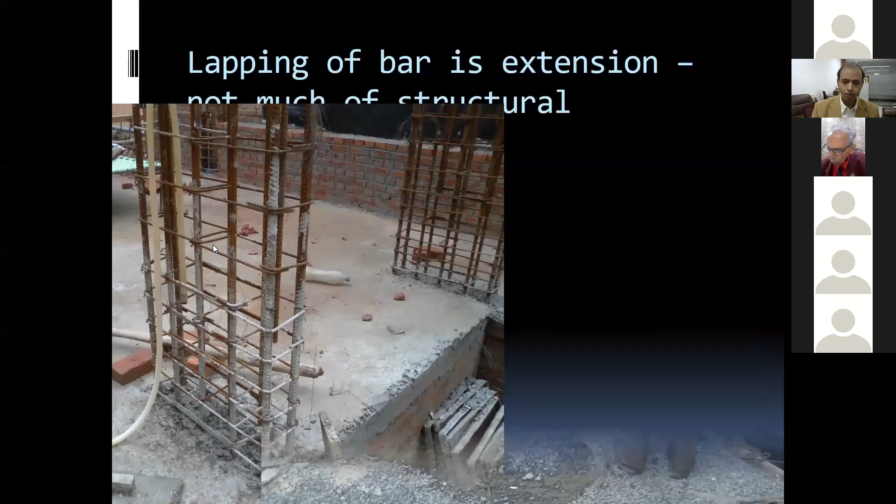So what I would say is, if we are going to say concrete quality should not be less than M25, then how can this kind of hand mixing be allowed at the same site? I'm showing the site drawing - how are they going to ensure uniformity in the concrete in the same floor, same column, same beam, which the software has taken into consideration as M25?

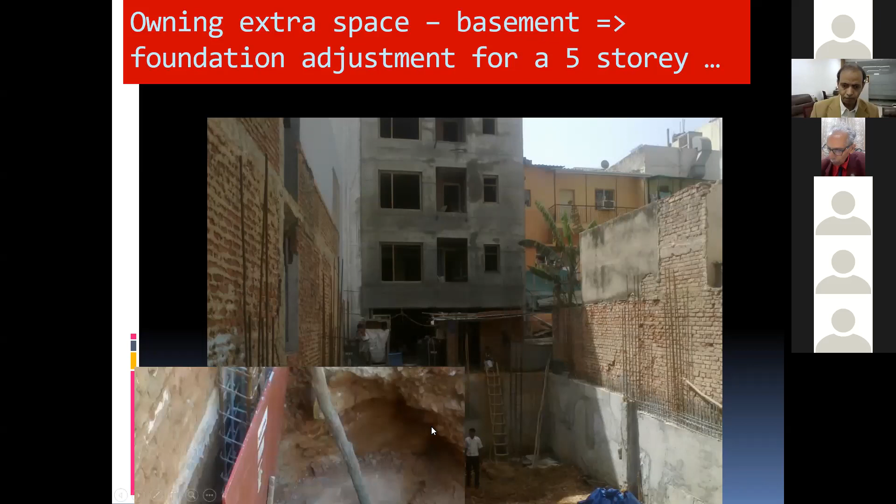It is beyond imagination. In the same site, you see private construction which is closed in by all 3 sides. And then when a column is being made, you see it is at one side with an eccentric footing. Software doesn't take care of that, nor does bearing capacity account for all these things.

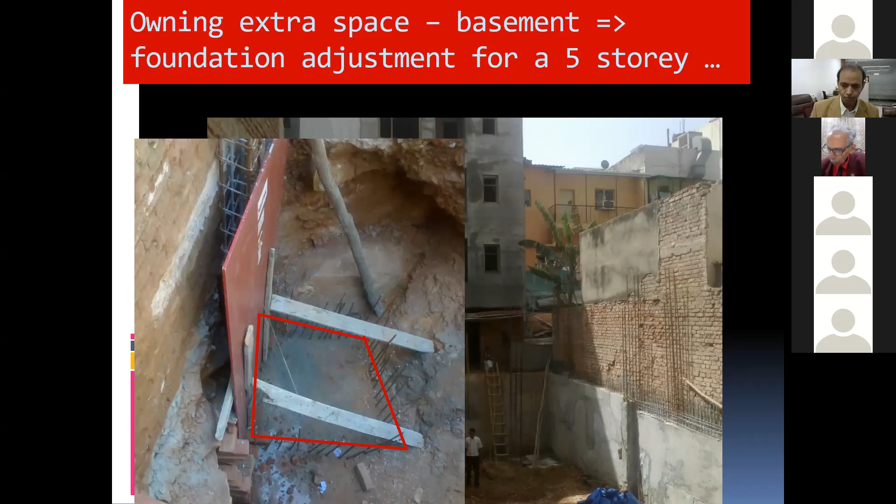So we go for over-design, safety, and all those things, and that costs. So finally, coming to this format - this is just another thing which we have revised in a simple manner, which can be taught to anyone.

Anyone can understand this questionnaire for say RCC building or brick building or even steel building or prefabricated building. We can change some of these, but it is more generalized here.

First thing is identify the building. In fact, in the next lineup of our training program to AICTE students and new or graduating engineers, what we are going to do is modify this format and also bring it to all of you, incorporating these things into the mobile app along with the details we discussed in my previous presentation.

We have to make it simpler for beginners to start with in the rapid visual screening survey. So first thing is identify these things, and also take representative photos and measurements, draw sketches showing location of staircases, drains, etc., showing good and bad aspects from the viewpoint of earthquake safety and vulnerability. This is only confined to earthquake, but later on we will add more dimensions, like fire and other things. Here about fire, we have added another question.

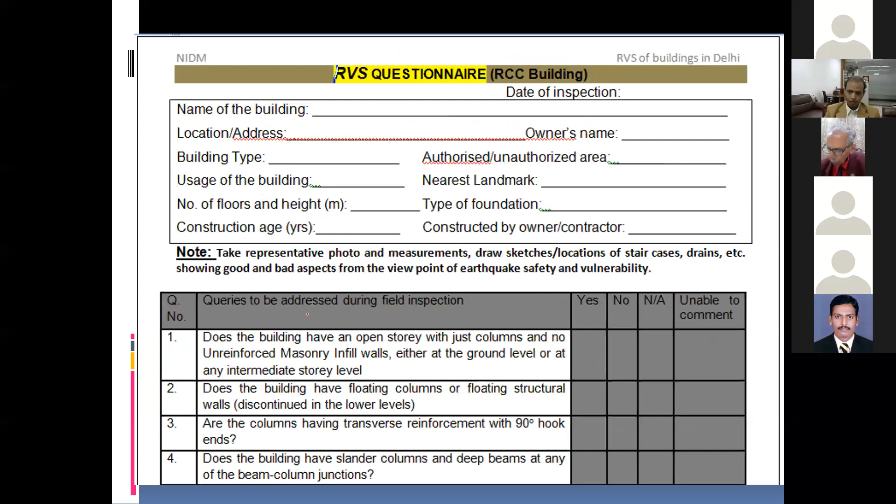So for question 1, we deal with just the first question. You see that it is having here, so there should be a mark like yes. This has a soft story at the ground floor, which you have to note down here itself, open story or something like this. So while practical training goes on, we take this format side by side, walk through, and note down these things.

Here there are infill walls made with half brick walls, or brick on edge walls. You see these buildings, how they have been made. It is very difficult to find out where it is not. You see that this is here, it is something, here it is something, and here it is something. So it is so difficult, just framing this question and going to this particular building, neglecting this one.

This is in a hilly area, or this portion, you see the intermediate wall, question number 1, intermediate. And here also in any part in the intermediate, and then these are the slopes. So this building shape, you can see how it is there. What is this? What is this? So every part and every dot, whatever you can check, whether it is here, or there.

I have shown you one building like Lalita Park building. After that, when we surveyed, we surveyed 10,000 buildings. One of the decorated buildings that we have shown with arrows, showing what are the wrong parts. That I have shown as a cover page of the report submitted in November 2011.

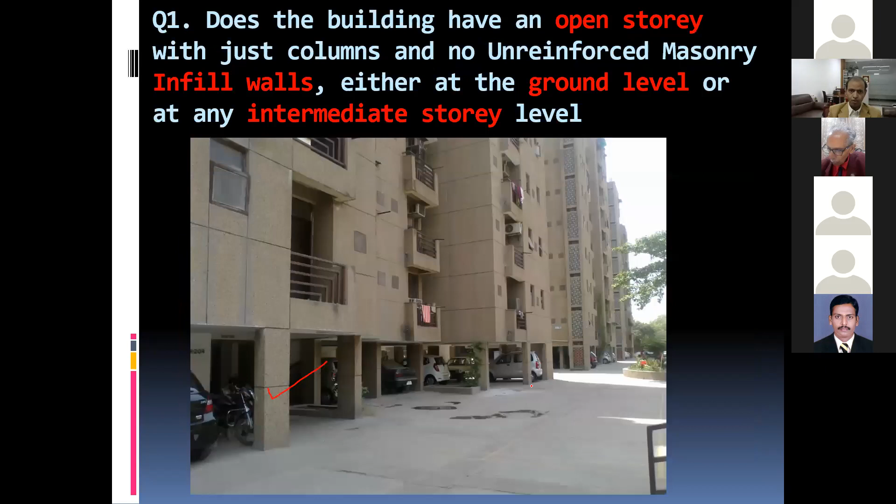So there are buildings that we have built up and we are making them, they have become cancerous organs, but still we are living until that D-Day comes, in the case of structural safety, fire safety, or electrical safety, or whatever is being indicated.

But as a beginning, we must check the current condition so that at least we have some kind of available resources and report, or at least we know which are the vulnerable ones. If some kind of warning is given, or these days IoT devices are being used across the globe, getting along with AI and intelligent cameras, we can check each and every part of this building by camera or by those devices, along with air quality, fire safety devices and their temperatures and everything.

Hundreds of such devices we can keep in our surveillance system. Then we can, 24/7, see where things may go wrong or are going wrong, or what is the current status. That kind of thing we can do more easily than correcting all those misconfigured items as per the questions shown over here.

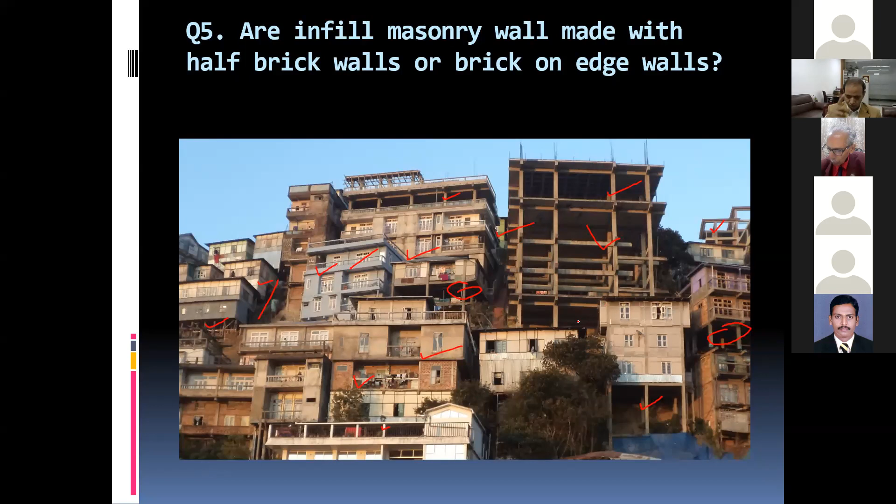So here you can see the infill walls and other things, edge wall, and question number...

Are adjoining buildings or adjoining parts of the building separated by less than 2%? Where is that? If height of the building, say 4-story or 5-story building, 3 meter average, so 15 meters, 2% of that becomes... 15 meters into 2%, how much does it become? 30 centimeters.

So if 15-meter height, 30 centimeters, because the building needs that free space, while the building will sway due to earthquake, it needs that space to shake or move on its own so that it doesn't hit adjacent buildings. So do you see that in this kind of building in a hilly area, that kind of space is there?

It is not there. So in that case, what will happen? The building may be stable due to earthquake, but it will make other buildings fail, you see floor height is, one is here, another is there. So this is a very strong part. If this hits here, we have many such failed buildings.

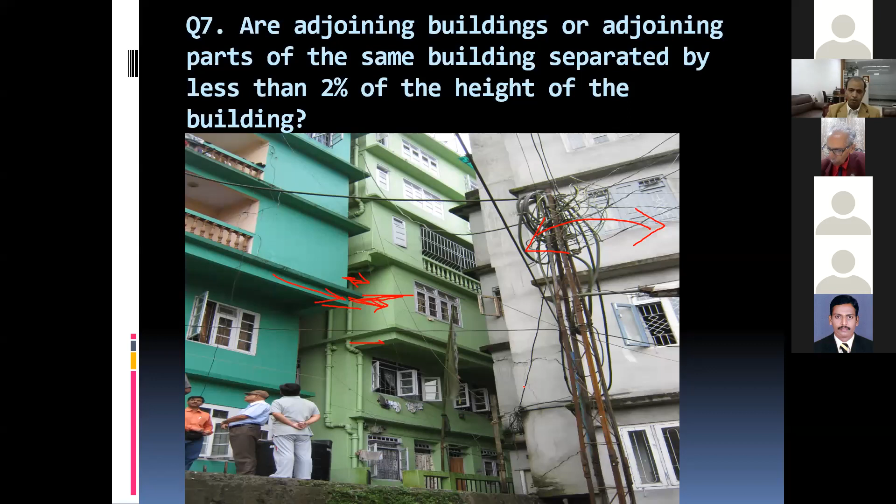You see that there is no gap. These are the buildings in Delhi, in East Delhi, where we did this survey. So what kind of rapid visual survey are we going to justify doing for such kind of things? It is just not possible.

That is why I was telling in the previous discussion that many of the buildings are not just retrofittable, not even thinkable for taking up any kind of retrofitting or reconditioning measures. They are not suitable. Only thing is that these days, a number of materials and know-how are made available.

At least to make one floor of this building, or even in a 3-bedroom house, one of the rooms may be made easily accessible from all the rooms in an apartment or multi-story building, which cannot be retrofitted but can be strengthened by putting some kind of very hard steel cases there.

At least it will act like a black box in case of an aeroplane crash or other things. So that kind of thing is also taken up, and moreover, not justifying that this is retrofittable, but at the ground level we can go for isolating the vibration, not letting it reach the building.

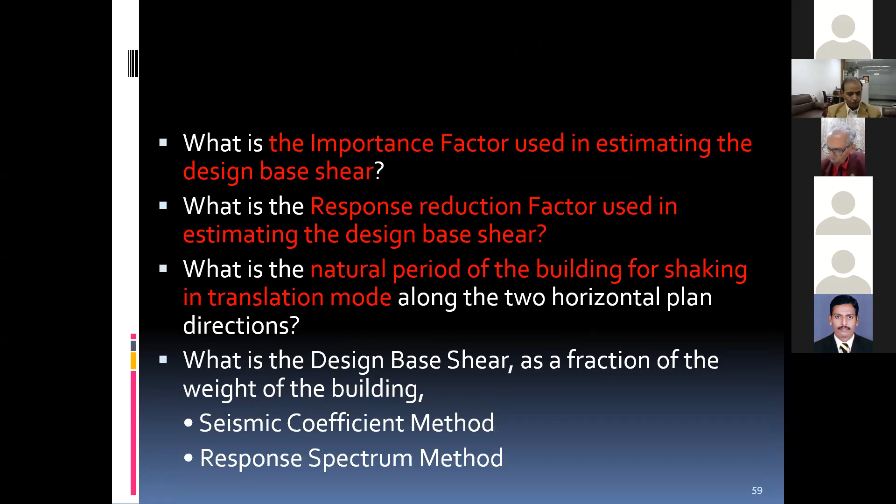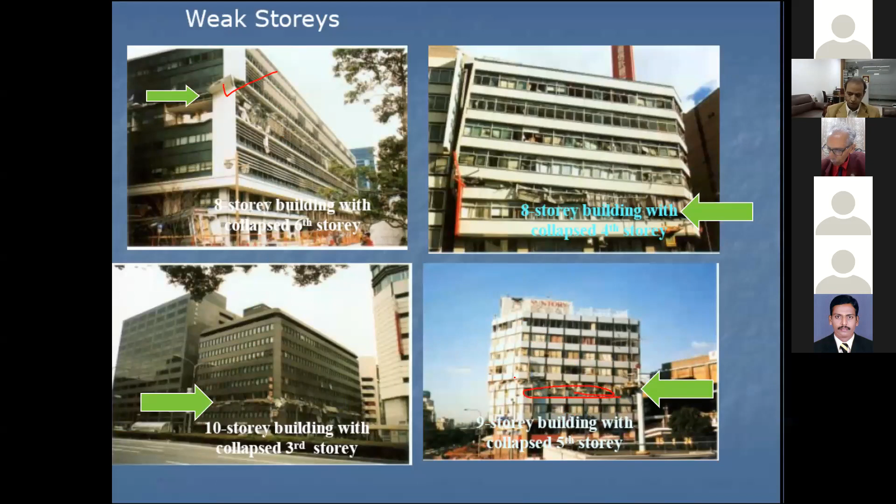So such kind of failure in the Kobe earthquake also happened. And if soft stilt floors are not taken into account, this will be the fate of the building. I often show this thing about how our cars are parked inside, so we're going to see the fate of such buildings if stilt floors are there. So then how do we correct the stilt floor?

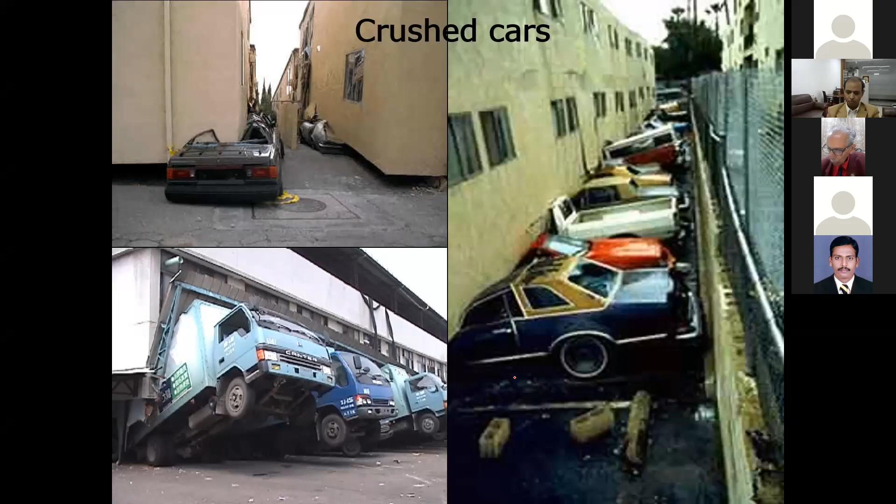But for that, I think I have spent a lot of time convincing people to go for a minimal way of retrofitting the stilt floor by flattening or at least jacketing, or these days we can isolate the entire building by cutting the column and placing some kind of devices that can isolate the foundation vibration, not letting it reach the upper floors.

Anyway, let me end over here. There are many things, each of the cases. Okay.

Rather than going for disaster insurance with so many companies that are available in the country, let us not get swayed by ensuring our safety through some company A, B, C, D. Rather, let us spend just a fraction of that in taking such kind of measures for tall buildings. Thank you.

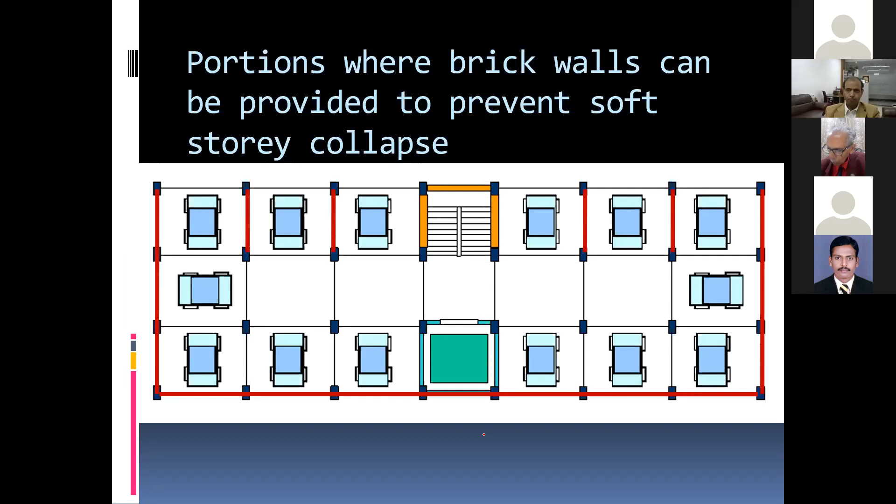Thank you so much, sir, for a very elaborate and important session. I think now the time has come that we should close. Should I present the concluding remarks? Wait, there are some slides that were not shown.

She's talking about the slides which you skipped showing. Oh, okay, we'll take those up later. Please be with us, your registrations are already there with CIDC and NIDM. We'll have a more specific face-to-face program after Omicron's virulence subsides, and we'll have more occasions to go through these slides that are being skipped.

The 3-day program has been a learning experience throughout, with technical presentations for the last 3 days. Several learnings have emerged regarding different topics from the case study of 10,000 buildings in Delhi, mapping of structural vulnerabilities in built-up facilities, non-structural criteria in vulnerability mapping of buildings, deficiencies in code provisions, performance objectives of buildings during earthquakes, retrofitting of buildings, and discussion on the RVS format.

There's no denial that RVS is an important tool which can actually decide the future of a particular building or infrastructure. Retrofitting could be one of the important tools for strengthening the structure of buildings. At the same time, non-structural elements are also important to ensure that even though buildings do not collapse, a lot of damage can happen due to non-structural elements of the building.